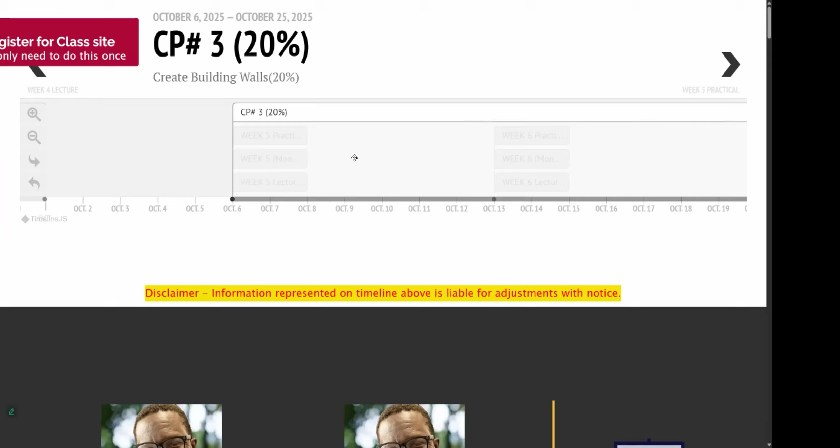Right, let's bring it up here. And if I look here, checkpoint 1, that's already gone. Checkpoint 2. So checkpoint 3, which is here, is going to be due. This is October 25. Today is October 13. Next week is going to be October 20, and that will be Heroes Day. And this is going to be October 25.

We're going to have a class on the 27th, which is going to be the day before. You said probably the 28th you'll have your final crit? Right, guys? Yes, sir. Interim, yes, sir.

All right, so tell you what. If you follow where I'm at this class, you can be done with checkpoint 3 before next week. Like you can actually be done. Next week we don't have a class, but technically we don't need a class to finish checkpoint 3, right? We're just going to do everything in this class. And if you are where I'm at, you can be done. So it's not like you'll be carrying this burden of checkpoint 3.

I'm going to be worried about that class on the 27th because I know that some of you will be MIA for that studio. Let me see, do we have a presentation on that day? Yeah, we have 9 and 10. We have the last 2 topics on the 27th.

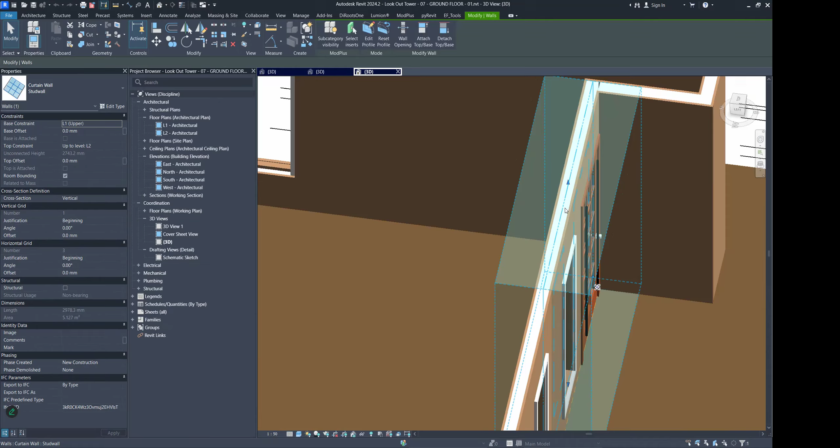For the doors and windows, how do we get it to basically show on both walls? Do we have to input it twice, or is there a way that you connect the walls? Oh yes, we did that in the exercise. You mean when you insert the window in the front, because we have 3 walls here: the front, the curtain wall acting as our stud wall, and then the inside cladding. So you're asking how you get it to cut the inside cladding.

Yeah, that's easy. I think Sarta was saying she had a similar thing. Sir, I cannot place the windows in the wall, I don't know why. I was trying to follow your tutorial but couldn't do it. Revit kept saying there's an error, and I kept trying to fix it.

I am not sure. All right, so if I delete these walls now... basic wall cladding. So I have an outside cladding right there. Did I group this? No, okay. Come on. Reset outline, there we go. Yes, delete.

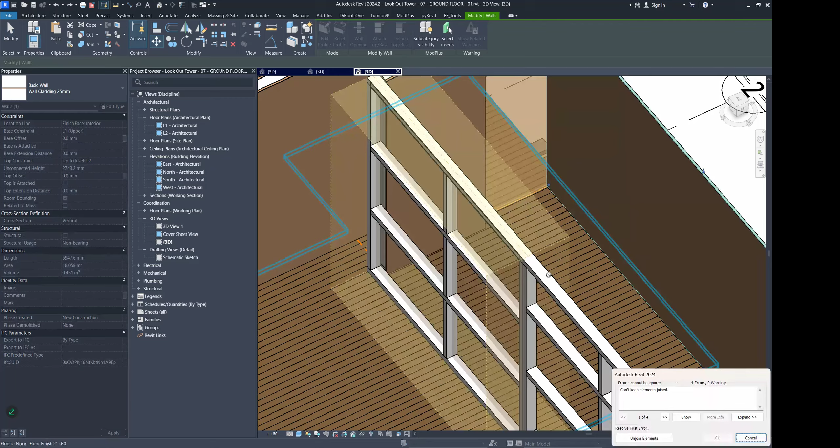So this is pretty much what you would probably have. There we go, thought I had two. Did not. All right, there we go.

And I'm going to place this space here, and this space here. So you should have something like this, where we have a curtain wall, remember we used that for that wall, and then we have the outer and the inner. Now for me to show you this, I'm going to peel this back a little bit.

So for the curtain wall, how you cut the opening is that we edit the wall profile. When you choose wall profile, I get a profile for this curtain wall here. So if I edit this profile, when this line comes around, goes up and around and down, then I need to delete this part in here. I'm going to use a trim tool and cut this. So this now becomes the profile of that curtain wall, and that's how I get the cut here.

Then as for putting in windows and doors, it's the same thing. In this case, if I wanted to put in a door, when I insert it, it's only going to insert in one of these, either the front cladding or the back cladding. So let me put in a door here.

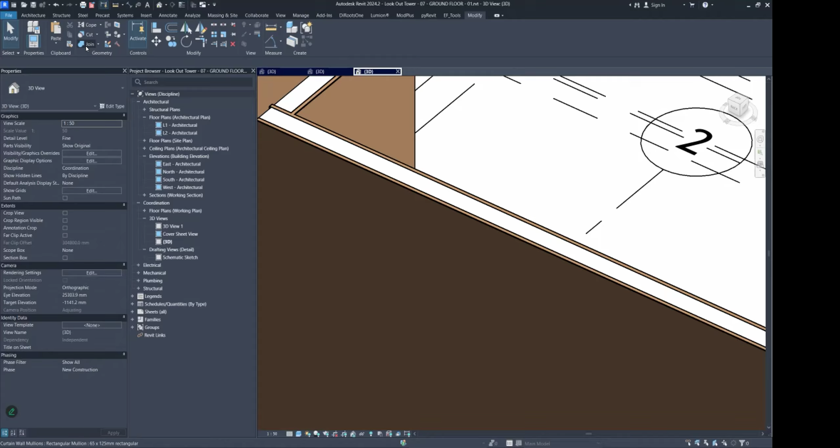Now, in order for it to cut the back wall, yes I could edit the wall profile of the back wall and cut out a profile like this. But a much shorter way is to go to modify and select join, then click the front wall and say I want to join it to the back wall. What that does is basically mirror whatever is happening in the front wall in the back wall. So if I move my door, it moves the cutout of the back wall automatically. That's how I cut all of these doors and windows in.

So you just join the walls then, and that's it. You use the join tool. That is a very nice, tricky tool that a lot of us forget about, even me sometimes. But in Revit, when you join an object together, it's not really joined like from a modeling standpoint, it's kind of joined from a meta standpoint. So even though these two walls are not touching, and I can still click on this wall versus that wall, they're still joined. That would mean that if I do something to one wall, the other wall will be affected too.

Right? Okay, thank you, sir. Yeah, man, no problem.

Third question. If I changed my design, just well, not even just a tad, because I remember you had even said to simplify it a bit more. Yeah, that's fine. You guys can edit it.

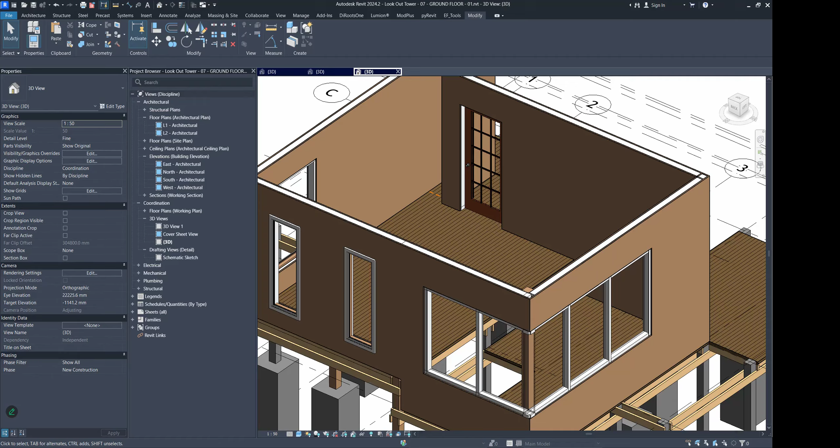So let us dive into continuing our journey, with our foundation and our site. Next, we need to start to work on the upper floor. If we take a look at our schematic sketch that we had here originally, we want to create this element here, which is kind of like an overhang, a partial overhang. So we need to add that in, and then we need to add the deck up top, and then go up with our walls up to our roof.

Okay, heading back to our view now. Let's see if we can sketch out our objective that we have here. So we know that we want an element that comes over here like this. So we do have an element that does something like this, I think. There's a little overhang there that we had in our sketch. Then the upper floor actually comes all the way out here, perhaps something like that, where it is then mounted to another post that's out here.

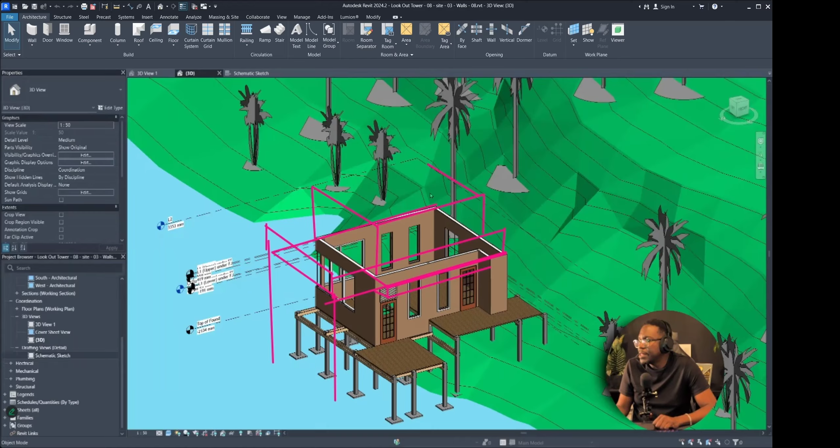So this would be our deck here. Then these walls would come straight up. We should have a little space on this side here, and then we should have the balcony. Then we should have a kind of shed roof that goes up like this, and then it is mounted like here. I know this sketch is probably getting a little confusing, but that's the basic idea that we are aiming for.

All right, okay. I'm going to take a screenshot of this and we will paste it with the rest of our notes here. We'll paste it right beside our previous sketch that we did last time.

Okay, so first let us see if we can get this element here. So to get this element here, it's really this wall that extends all the way down and then it meets up with this wall here. That's really what's happening. So I'll do a shift copy, an alignment, and I'll do another alignment here.

Now, of course, we don't want this. We want the wall to actually cut up this side like that. So we are going to use the edit profile and draw a profile like that. I'm going to trim this up here. All right, so you can see this is the profile of the wall. It does that. All right, so we're going to choose OK.

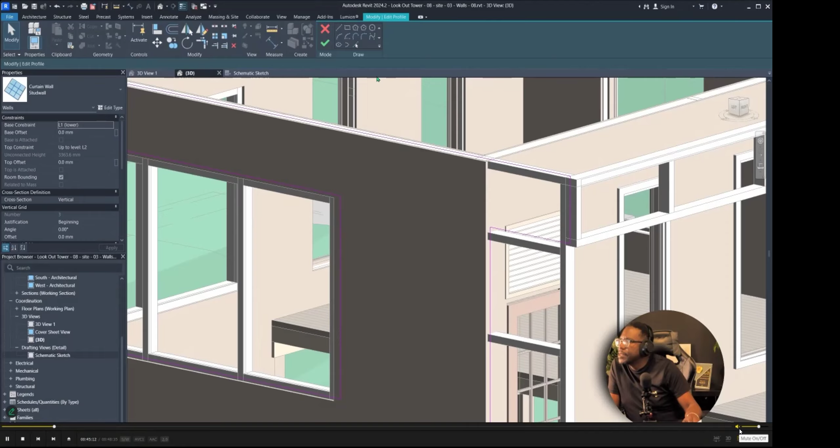There we go. So we need to do the same thing for this side now. So we need to go to the wall and go to edit profile. Let's align these together. There we go.

If you're talking to us, Brian, we're not hearing you. Oh, geez, sorry, sorry.

Right, so I was saying that when you're using the edit profile, don't depend on it 100% of the time. For example, if I wanted a space cut out of here, it would... where is it, here, right. It would not be efficient for me to draw a wall down here, then draw another wall here, and draw another wall up here. That's not going to be efficient at all.

At the same time, if I tried to use my... where is it... my wall opening tool, the wall opening tool doesn't allow me to cut all the way to the edge of a material. My wall opening tool allows me to cut inside of a wall and have an opening in a wall. But if I wanted to cut all the way to the edge, the wall opening tool will give me an error, it will say it falls outside the wall. So in that case, this is when I would lean on using a profile to do that.

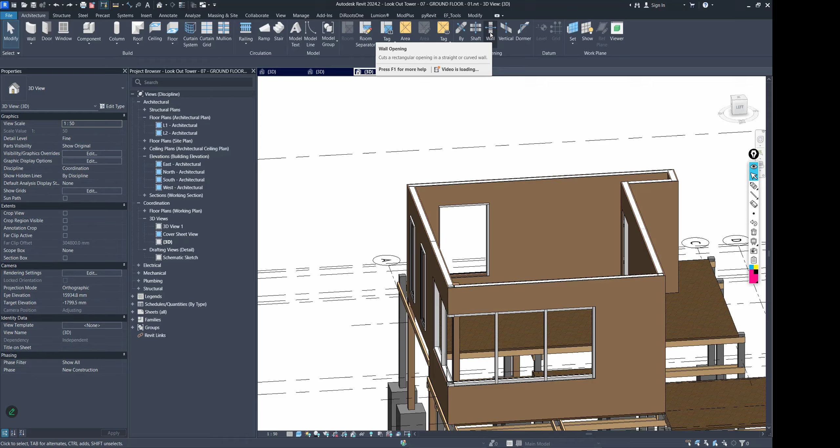But I would say you move up the rank. If you need an opening in a wall, the first opening I would use is going to be a door opening. You can use a door opening, or a wall opening, or an edit profile, but take them in that order. Because when you use the edit profile, it stays in one place. If this was a door and I wanted to move the wall with the door in there, it wouldn't move—the wall would just move and the opening would stay in place.

This wall here. So what we can do is we can actually connect these walls here like that, and then we're going to edit the profile of those walls. All right, choose OK. We do have an overlap, or maybe it's not touching. Yeah, okay, there we go.

So we finished that part. Now we need to do this part. So we're going to do the same thing, edit a wall profile. All right, so now we have this element here, so we can pretty much now do our floor slab on top.

Now we plan to have the stair in this corner here, so maybe we'll go up and then bend a corner to go up the stairs. So we'll just keep that in mind for later.

Now, before we draw the floor slab, we want to take a look at how the construction of the slab works. If we look at this section here, we can see our stud wall that we have below, and how it works is that we have these wall plates—in this case it's a double wall plate—and then you have the floor that's sitting on this wall plate here, and then we have kind of like the outer covering here.

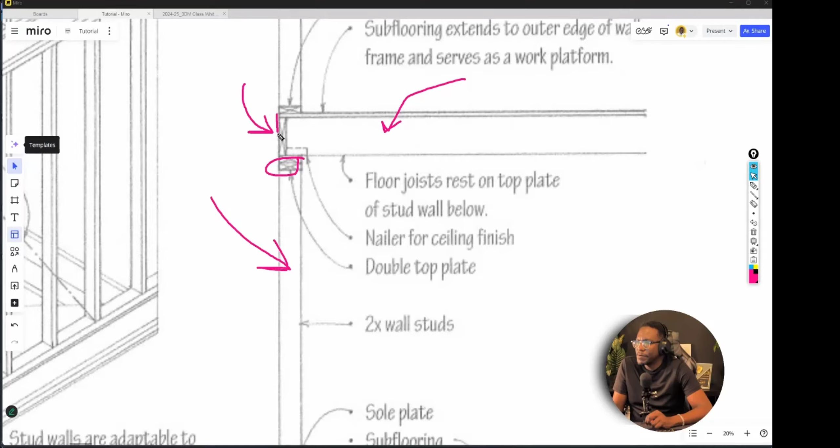So we have this outer member here, and then we have the floor joist pretty much sitting on top of the bottom wall, and then we can mount our walls to the floor, which will sit on top of this floor joist. So this is the concept we want to use, and this is kind of what it would look like in 3D.

Now, if you remember our last conversation about the different detail levels, we're kind of going for this one, meaning we don't need to construct every single timber member that would structurally make up this floor. Instead, we're going to summarize it and only put in the major elements. With that said, let's continue.

Now, if you take a look at what's happening for the floor system here, you can see the major floor joists running along, and then you have this covering that sits on top of these floor joists. Then you have the next upper floor walls sitting on top of the finished flooring. So this is how we're going to construct it.

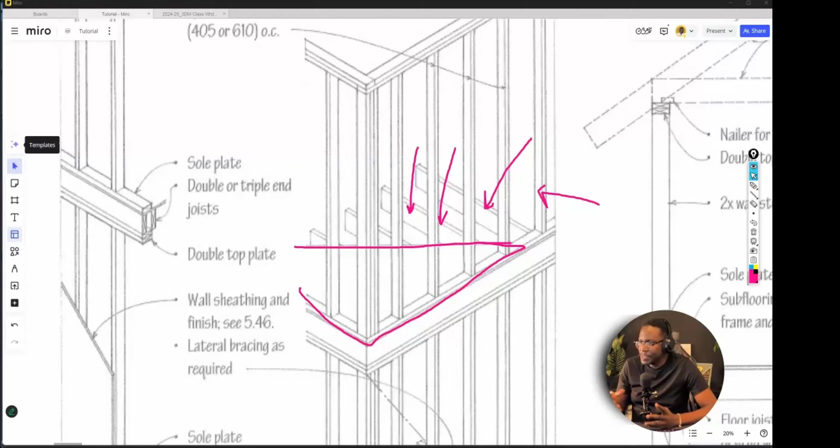We're going to put these main floor joists in 3D, but we're not going to put all of these individual pieces of timber here. We're just going to summarize our 3D model into only having the major elements. In some cases we might need to model all of these members individually, but rarely. Usually you average it, and if you need construction drawings, you cut a section and detail the members individually. So we will not be modeling every single member here, only the main floor joist you see here.

So now what that would look like for us is we would have main floor joist members running something like this. As a matter of fact, we might run it the other way actually. So we'll run it this way—this is just a rough sketch to give you a visual idea of what we'll be doing for these floor members here. And then we'll have a timber stud here that it is mounted to. So that's the general idea.

Now to get this done, we're actually going to use some tools from the structural section, right? So we are going to...

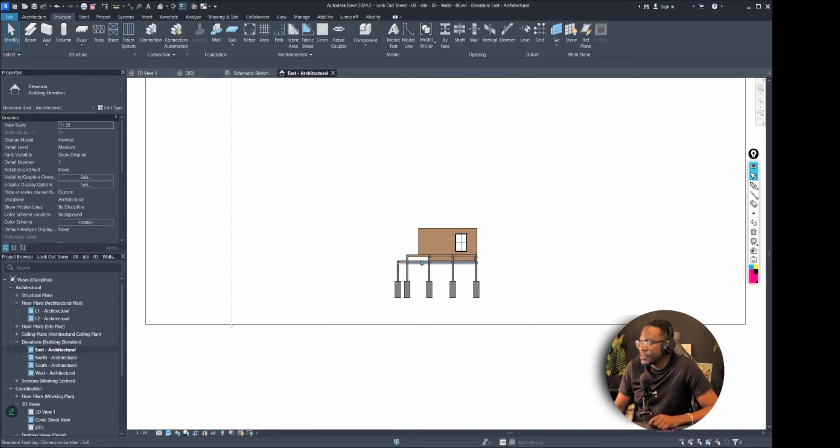Now to do this, let's take a look at the levels that we have. So if I go to my elevation view, I'm going to go to the east elevation. I'm going to hide my site plan again, so I'll right click and choose hide elements. All right, let's see. Okay, let's use this view. Okay, so let's hide that.

So now that we have just the building alone, we want to create those members on the second floor. Now, these members are actually going to sit on top of this floor here. So what we need to do is create another level. We're going to duplicate this, copy, make it 6 inches, and then unlock this so I can make this one shorter. This level here will be top of floor joist, so my floor joist is going to be running in this direction.

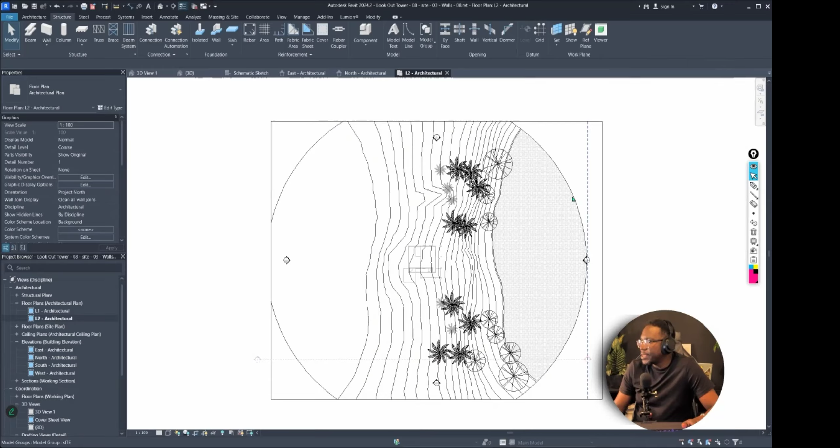Now, in order to put in the floor joist, we are going to use what's called a beam system, and that can only be done from a plan or 3D view. So I'm going to go to my level 2 floor plan. Again, I'm going to hide this site plan because I don't need it now. So I'm looking at the floor below, that's why it's grayed out. And I'm going to head over to structure, beam system.

If I look in the settings for beam systems, you'll notice I'm going to put this on the other side—there we go, so we can get some more space over here. So if you notice, you see the rules: it's going to lay out the beams at a fixed distance, and this is the distance between the beams. Maybe we could do 900 millimeters, about 3 foot between the beams. It's floor joist, so maybe it would be closer, so maybe 600. It's going to be using a 2x6, which is fine. And it is going to be on—we need to choose what level they will be on. Now we can always draw the structural members first, and then put it on a level.

Now if we look at the top, you'll see where it says automatic beam system or sketch beam system. So we're going to go to sketch beam system. When we go there, you can see that it's going to put it on level 2. Actually, we don't want it on level 2. We want it to go on the level that says top of floor joist. So we're going to go to set work plane, and we're going to use the level that says top of floor joist as the level for the beam system. Okay, so now all we have to do is draw our beam system.

I'm going to start from here. I'm going to draw a rectangle like that, and I'm probably going to make it go maybe to here. Maybe it will be wider. We will see if we'll make it wider. Now these two lines that you see here give an idea of the direction of the beams. This means that the beams will be running this way. All right, so we're going to choose OK.

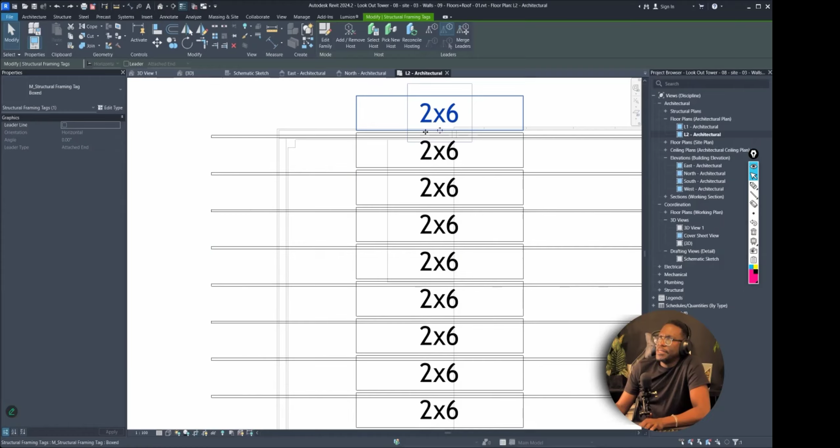Now if we click on one of these members here, you will see that it says it is a framing tag. And a tag simply means that it is an annotation. So for example, I can just delete these tags. If I go to annotate, you will see there is a tag that's here. Basically a tag is, you can pretty much just tag anything that you click on. So if I hover back on the beam here, it will create back this tag. If I hover over this wall, it will create a wall tag, and any member that you hover over, it will create an actual tag. So let me undo that. So that is what this is, these are just tags. I'm going to just select all in view and just delete that, because we don't need to have the tags for what we're doing.

Okay, so let's look at this in 3D. So you can see that is our beam system there, right? And what we may do is we may extend these posts to maybe use it as a mount for these posts here. We'll investigate that a little later. All right, so yes, we have our system, our floor joist system there.

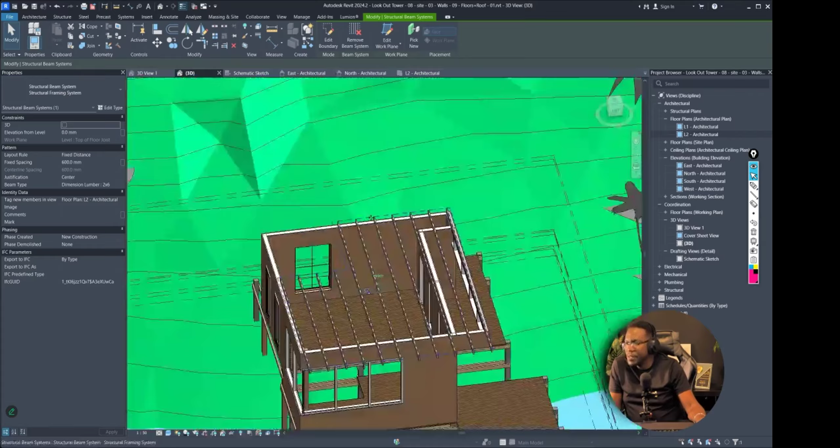Now we are going to cut a hole here for the stairs later on, but that will not be an issue, because remember we used a beam system, so we don't have to manually adjust each of these beams. We can simply just edit the beam sketch that we drew, and we can actually just put a space in here. We can trim this like that, choose OK, and there you go. So now we have a hole that we can work out later for the stairs. And this is the beauty of using the beam system, is because it will automatically be generated when we use it.

Okay, so now we're going to put the floor on top. So we're just going to undo this last move here, because we're not going to put in the stairs just yet. We can always cut that hole later on. We know the general area for the stairs, so we will refine that as we go on. Now to put on the slab here, we're just going to put a floor slab on top of this.

So to do that, well, we can actually go to our side view here. Actually, this is a little lower, so we're actually going to move that down like that, and we're going to create another level. So we're going to copy this, and we're going to call this FFL for finished floor level. We're going to maybe copy it about 2 inches, and we are going to just break it out so that we can see what we're doing. There we go. And we're going to call this finished floor level.

So this is where our slab is going to go for the upper floor. So let's go to a floor plan view, preferably. This is our level 2 plan. So we're going to go to architecture, create floors, and right now this is a 12-inch floor, so we are looking for a 2-inch floor.

Here we go, floor finish 2-inch. All right, we're just going to use the box and draw our floor finish pretty much inside like this. We do need to set the level, so we're going to make the level be FFL, floor finish level, and choose OK.

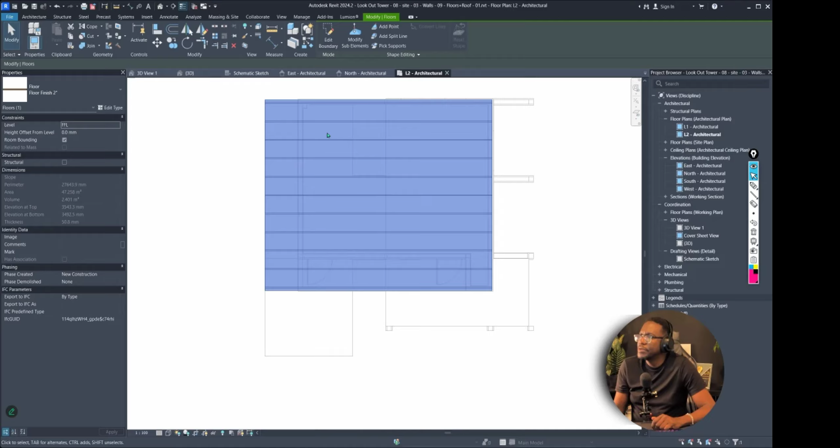All right, let's look at that in 3D. There we go. So now we have our floor finish that's sitting on top, and then we have our floor joist that is sitting below.

Now, in my case, I do want my deck to go out a bit more to match my sketch, because in my initial sketch and also in my schematic design, I had it where my balcony was pretty much going way over to a greater overhang. So I'm going to edit the sketch here, and extend it by moving this by another, let's make it 900.

Yeah, that's okay. And I'm going to do the same thing for my beam system. Notice I can select the individual beams. For example, if I really wanted to place this beam at the very end, I can use tab to tab into just a single beam, and I can actually align it. Oh, right now it's locked, so I'd have to unpin it. There we go, now I'm able to move that beam individually. But the great thing is that it's still part of the beam system.

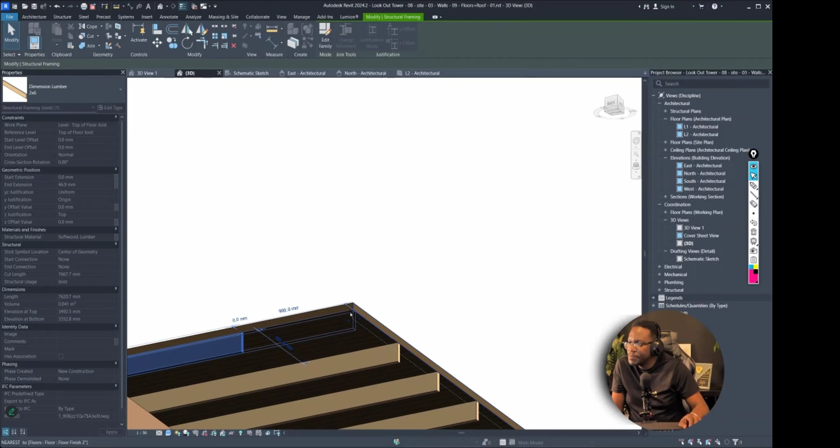So let me unlock that, and I'll use my align tool and just align it like that. Now I'll go into the beam system and edit boundary. There we go, choose OK. Oh, because I unlocked this one, now this one is all manual, but that's okay, I can just extend it. All right, so now pretty much I'll have another column.

So I'm going to align this with this edge here. What I should actually do is just copy all of this, and then I could use a view. If I can't see below, I could go to my options for the view, and say for underlay, let me see all the way down to bottom of foundation. That would allow me to see all of these.

Now notice that I still can't edit this from this view. I can actually overwrite that by going down here and saying allow me to select underlay elements. So I turn that off, and now I'm able to select these. There we go, okay, this goes all the way to the edge in here. That's fine, I'm going to copy this to the other side. There we go, and I'll turn that back.

Let's go back to the 3D view now. All right, great. So now all I need to do is set this column's top level to be finished floor, and same thing for this. All right, so now I have my members here. Now I do think this column needs to be much thicker based on how high it's going, so we'll have to edit that as we go on.

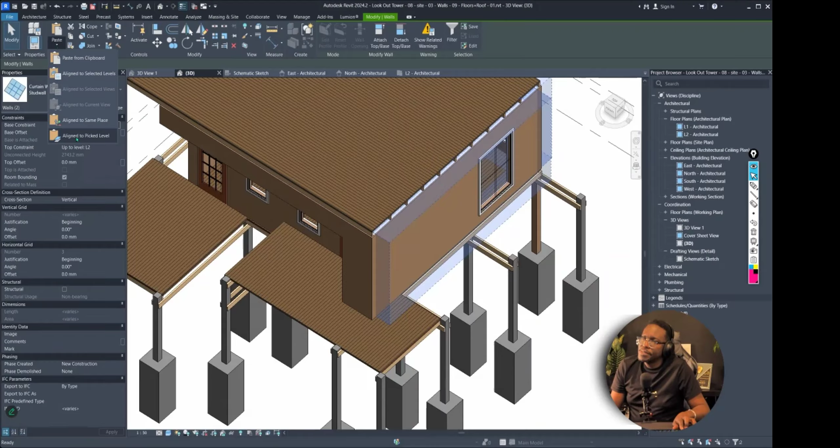Okay, so now we're ready to continue with our walls. With the walls, it's pretty much the same formula as the ground floor, where we just carry the walls using the frames. So we could select these two walls for now, go to copy, then go to paste, align to selected levels, and paste this to the finished floor level. There we go, so now we have pasted them. All right, so now we just need to continue.

Now this wall here on this side is going to be aligned with here actually, so I'll use a top view and copy this over here. I'll paste it in the center. Oops, meant to paste this in the center like that. Let's go back to 3D view.

There we go, then we're going to cut this down. Come on, there. And we do the same thing for this wall. Let's go to a floor plan. We can turn off the underlay and set the underlay to go to level 1 lower. There we go, so now it doesn't look so confusing, and we can copy this there.

All right, so we pretty much have our upper floor walls done, and then we're going to have the balcony that is going to be around this edge here.

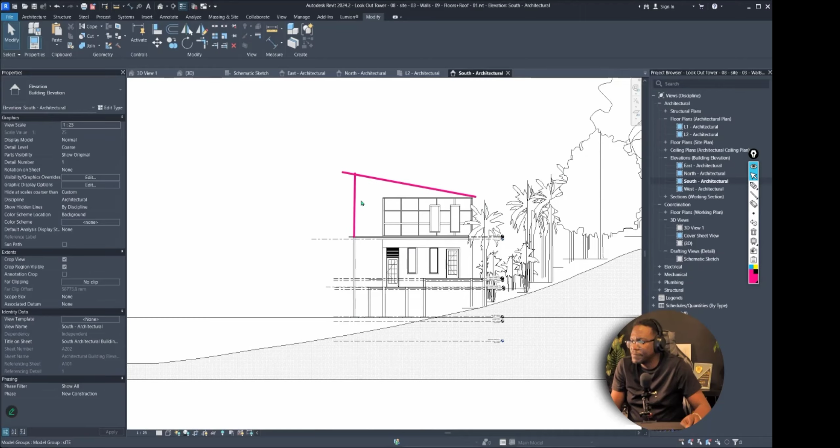We're not going to worry about the openings just yet. We're going to put in our roof first. If we go to a side view here, this is the back. Generally we want a roof that slopes like this, supported by columns coming from the ground floor, with balconies doing something like this. Then we're going to work on filling in the areas above where we have the walls.

To get our roof, we're actually going to draw it using the top floor plan. To do this we need another level, so we're going to copy one up. We don't need a floor plan for this level since we already have an upper floor, but we need another level to use for the roof. I'll copy this level here and call it top of wall plate, because that's the top of that wall plate.

These walls are not on the same height, so we need to fix that. Let's highlight all the walls and use the filter option to select only walls. We'll set the top constraint to top of wall plate, with the top offset at 0 since we don't want it to offset from the top. Now everything is on one level. Let me check - yes, everything is there.

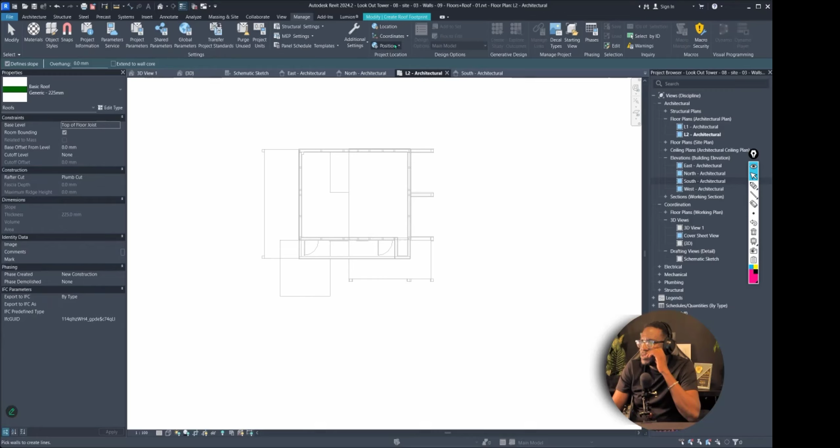Now we need to do the roof. We'll go to a plan view on level 2, then go to Architecture, then Roof. The roof is drawn by sketching, so we're going to sketch the outline of the roof, starting from here. This is the outline of the roof.

When drawing the roof, we could set an offset, which is the overhang. So we could set a 2-foot overhang. Now when we draw it, we automatically get a 2-foot overhang like that.

Now we need to define the slope for each of these edges, because of how Revit works. If you imagine a hip roof - right now this is creating a hip roof because this symbol defines a slope. It's saying I want this line to slope up, same for here, and here, and here. When Revit puts all of that together, it assumes that if you want all 4 lines to slope upward, you must want a hip roof, since they'll all intersect at one point.

If we want a roof that just slopes one way, we need to erase the other slopes, and then Revit will know you want a roof that slopes using this line as the pivot, sloping upward. To do that, we select each one of these: select this and say no slope, select this, no slope, select this, no slope. So now the only thing that slopes is this line, and it slopes by 36 degrees.

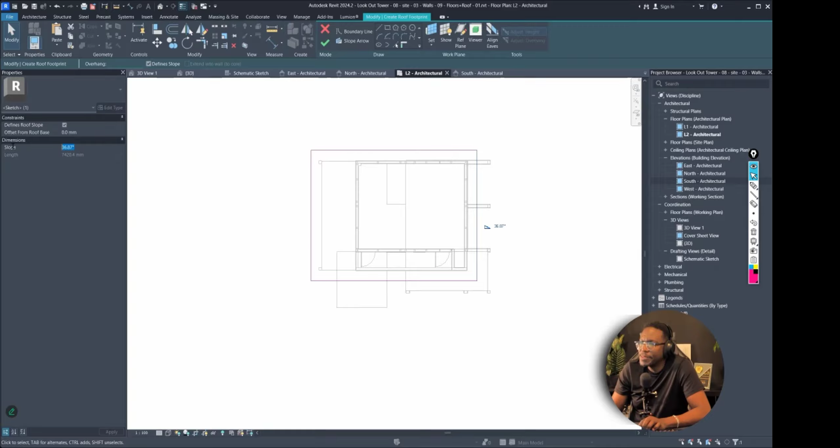We're going to put that to 25 maybe. The thickness of the roof we can change afterwards, so we'll choose OK. If we look at our side view, we see that it slopes upward - of course it slopes from the top of the ground floor. So we need to change the base level of the roof to top of wall plate. Now it slopes upward.

I think this angle is a bit too steep, so let's go to edit. If I go to edit from the elevation view, it's going to say you can't edit the slope of the roof in the elevation view actually.

So I need to do that from either a 3D view or a plan view. I want to change this slope to like 15 degrees. Okay, yeah, I think that's a little bit more reasonable.

Now what we want to do is change the thickness of the roof. We have some pre-made roofs here, but we're actually going to put structural members as well. So we're going to choose generic, go to edit type, and duplicate this, and we're going to call this roof covering. We'll go to structure and make this 2 inches. Say okay and okay. So now this is 2 inches.

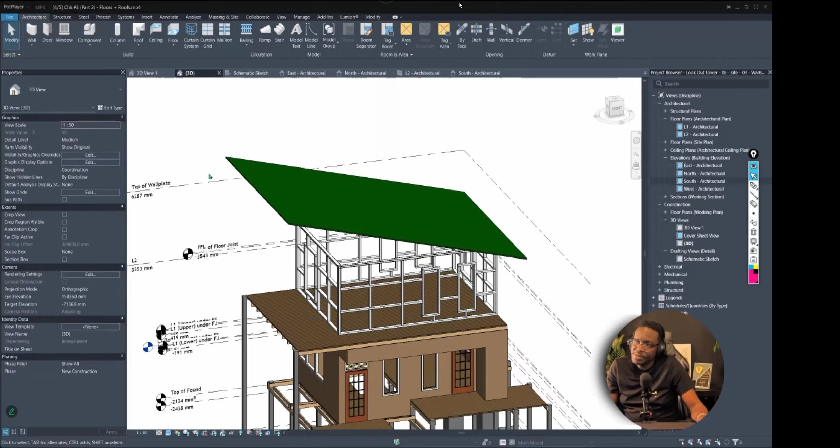Now the next thing we want to do is put the same structural system and attach it to the roof. There are a couple ways we can do it. We could attach a structural system to the slope of this roof, and that way we can get the beams to slope with the roof. Let's try it that way. Let's see if we can do this in a 3D view.

We're going to go to structure, then beam system. Before we go any further, we're going to set a new work plane. For this work plane, we're going to choose pick a plane, and we are going to pick the underside of this roof like that. So now the beam system is using the underside of the roof.

So then I'm going to go to sketch my beam system, and I can actually just sketch on the underside of this roof because I made it the work plane. There we go. And I can see that my beams are going to go this way, and I'm going to use the 2x6. I could also choose a thicker member if I wanted to.

I would have to load more lumber in. So for example, if I wanted something apart from a 2x6, I could go to insert and go to load family. Then I would choose structural framing. Let me go back to structural framing under wood.

And then I'm looking for dimension lumber. When you load that, you see these other ones here. So I could do a 2x12. Now that that's loaded, I can change this to 2x12. And the distance is 600. Then I'm going to choose yes.

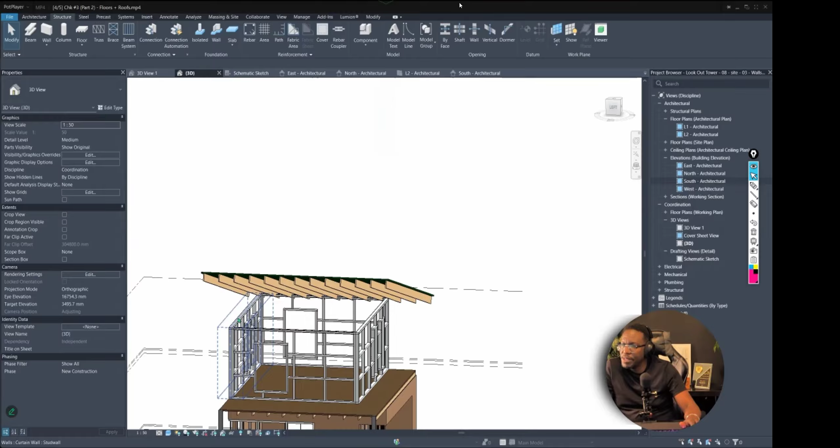Now, the next thing we would normally do is allow these walls to automatically meet the top of the roof. There are two ways we could do that. We could actually use the profile and edit the profile, or we could click on the wall and go to attach top or base. So we're going to do this, choose here, and then it would attach itself to the top of the roof like that.

Right, so when it is attached to the roof, you can see that is what is happening in the background. Now, in reality, you would really have one of these members on top, and then this wall plate would be attached to the underside of one of these roof joists. The thing is, you can't use attach top or base to a joist. But there are some other things we can do.

So we're going to undo that. Now, of course, we could go in and draw our profile, and we could actually draw a wall profile that is to this angle, and that would be okay. But let's try something else that is new.

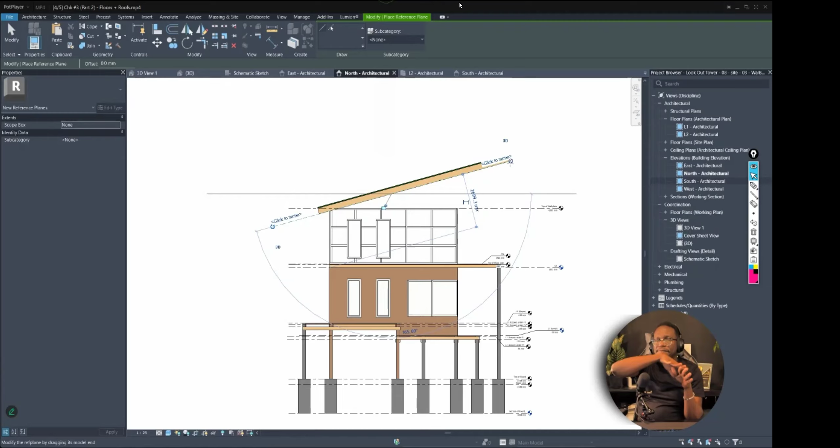We're going to use a reference plane. So let's go to our side view here, and go to the architecture tab, and say reference plane. What a reference plane is, is simply a plane that is referenced. It is a work plane, think of it as a work plane. Remember how we have work planes, and if we define a work plane, then that becomes the base on which we draw, we work. So a reference plane is like a custom work plane.

For example, I've now drawn a work plane at an angle. So if this were my current work plane, I could extrude from it, I could draw on top of it, I can do all kinds of things with this.

So I can give it a name as well. I'm going to call this underside of joist.

Now what we're going to do is go to 3D view. We can select the wall, but we won't see the reference plane in 3D, so we'll have to do this from a 2D view. Let's go back to our 2D view. We're going to say attach, and then choose this reference plane.

Now I'm getting this message because remember we have edited the profile of this wall, so it's just telling us that some of the elements in here might be deleted because of the profile. All right, let's attach the other wall now.

I'm using tab, that's this wall. Attach the reference plane. All right, so if we go to 3D now, there we go.

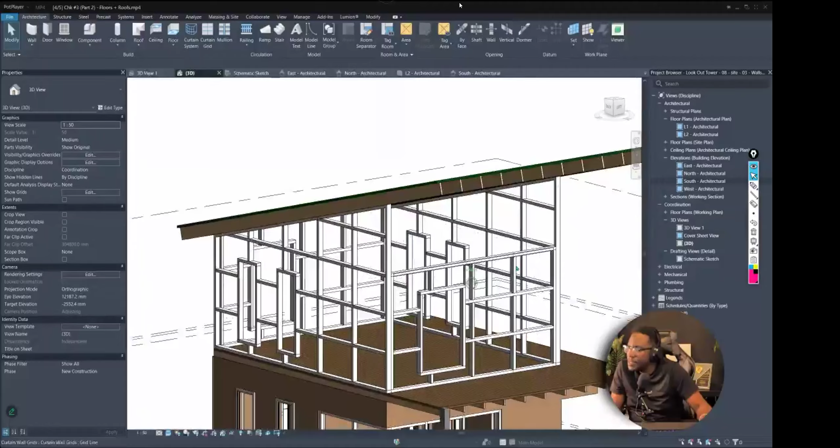Now, of course, we would adjust these members to line up with that. Before we do that, let's just adjust this one here. Just drag this up and snap it to here.

Now what we could do is select this member here and unpin it. That's one option. Let's see if we can copy it. But if we're going to copy it, we'd probably have to do it from a top view. That would be best.

We could go to top view and go to wireframe. Maybe this would be too confusing, so we could actually hide the roof and now we're able to see the top. So this is the one here.

So we already unpinned it and we can actually copy this here. Let's look back in 3D view now. Oh, we are in 3D view. All right, so you can see where I made a copy of that one to be sitting on top right there. It's actually 3 members that I placed here.

So maybe we could get rid of this one. All right, we're going to go to the unhide tool, which is down here, and we're going to unhide this roof. Unhide. There we go.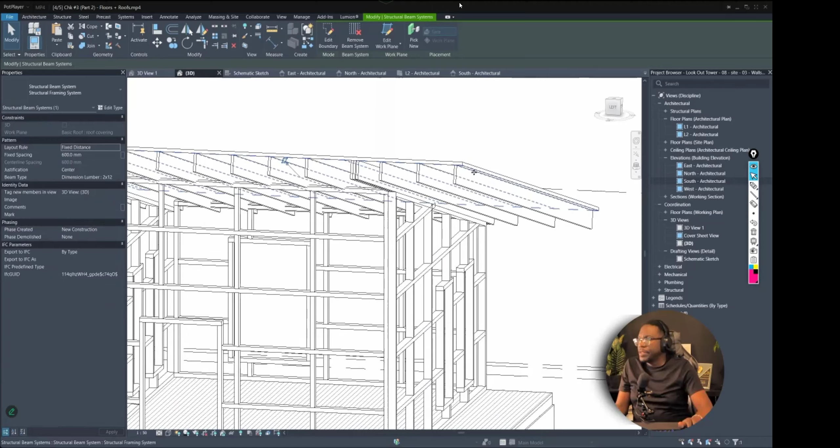Now, additionally for the roof structure, we normally have some laths that are running the opposite way as well. To do that, we can actually just duplicate this system to create that one.

So I can find the beam system, I'm pressing tab, there it is. Then I'm going to choose copy, and then choose paste to same place. So now I have 2 exact beam systems on top of each other, but now I'm going to go to edit boundary and say define beam direction to go this way instead of that way. And then I choose OK. Now you can see I have a set of beams running the opposite way.

Now, obviously, we don't want to use the same size beams, so we're going to have to go to insert family, load dimension lumber, and I see 2x3 is the smallest one, and choose OK. All right, so for this beam system, we are going to change that to 2x3, and you can see this is much smaller. Now, this could be how it is built, because we could cut notches out of this timber here, but usually it sits on top of this member that's here.

So to do that, right now this is attached to the underside of this roof member here, so we would need to attach the beam system to some reference planes. We're going to use the same reference plane concept as before. We're going to go to architecture.

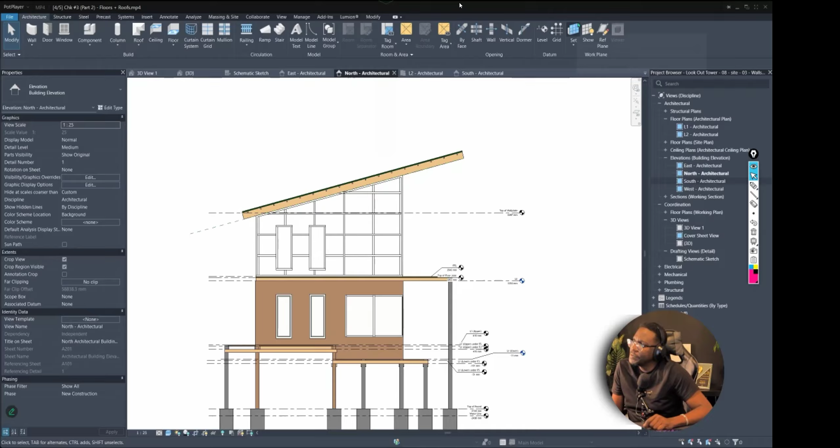Now I can go to create reference plane and I can draw a reference plane here like that. And I can name this beam roof joist reference. I could copy this again. Now what's the distance here? And I could name this reference plane lath reference plane.

All right, so here's what I want to do. I want to find out this height here. So this is 64 millimeters, or 3 inches, right? So I actually want to go the opposite way, really. I want this to be 3 inches away from this.

So now I can select this. I can select the beam system for, can I do that? I can't do that from a side view. I need to do that from a plan view.

So let's select the beam system for the roof joist. We're going to say edit work plane, and we're going to choose edit work plane rather than pick a plane, because we can't see the reference plane. We're going to attach this to the roof joist reference plane, which shouldn't move.

But then we're going to go to the beam system for the lath, and go to edit work plane, and put that to the lath reference plane. And now see that now sits on top.

Actually, I need to edit that some more. So let's go to the side view to change this. We can actually move the reference plane and it will move here. So for a dimension, this should actually be 64 millimeters. Then we can actually move the roof to this reference.

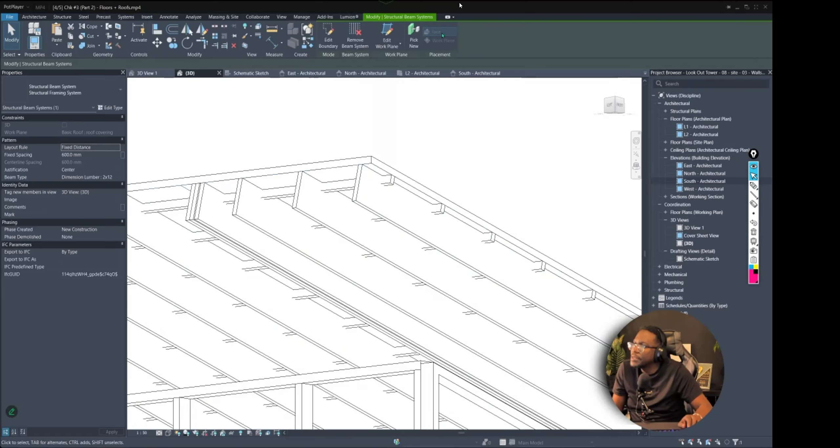Now I think what's happening here is that we had one of the members still attached to these guys here, so we want to attach this one to the roof joist reference plane. There we go. Now you can see that we still have these ones here because we actually broke the link off with these, so let's remove them for now.

I think we actually had this using the beam system to get these members on. So now we can actually fix this beam system because we kind of messed with it by clicking on it and going to edit boundary, then choosing reset system. So now it will create back all of those members that we edited earlier.

All right guys, so you see a lot of discussion here about the roof members, and all of us will have different roofs. I chose to put in the lath and the roof joist and the covering because each one of us has different designs. So I kind of chose the most complicated way so that you can just take from it whatever applies to how you want to do your design.

But remember, the roof cannot be a slab, right? It has to be a timber roof, so you do at minimum have to have roof joists. You don't have to put it at an angle, you don't have to use a hip or a gable roof, but you do have to show some kind of roof structure to get the full marks.

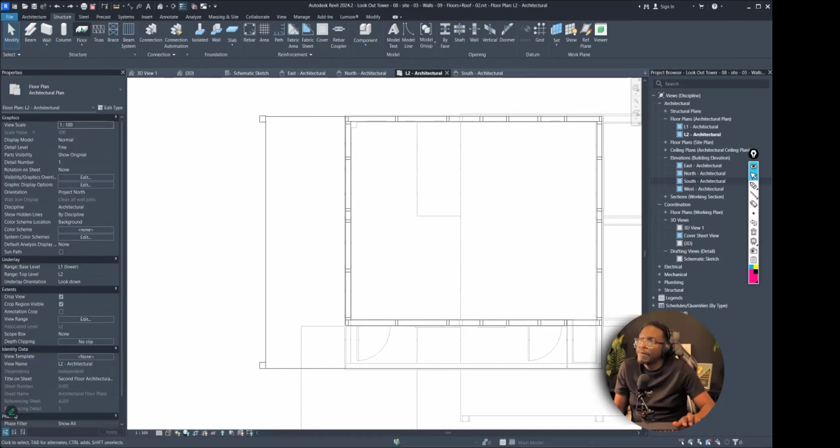Now remember, we're not seeing it because it is probably... let me undo that. Let me go again to draw. But I need to determine what level I am on. So right now it is going to be on level 1 upper, but I need this to be at the top of wall plate. There you go. Now it is actually there.

If I go to 3D view, I should see it. Let's see if we can locate it. Okay, let's do that again. Okay, there we go, that's what we're supposed to see.

So, okay, what I want to do is to draw it here, but I think when I draw it there, it is actually attaching to something - that's the problem. So, right, here it is. So let me delete this. So what I need to do now is go to edit work plane, and I need it to be the top of wall plate level.

Okay, so there we go. Now it is at the top of wall plate level, which is right here, if you remember. So let's go to the side view and full detail view so we can see it better.

Ideally, now we could attach it. We could make a reference plane right here, or we could use a level as well. I think in this case either option will work.

So let me copy a level and put that level right here, and I could call this level 'wall plate for upper shed support.' That's a very long name.

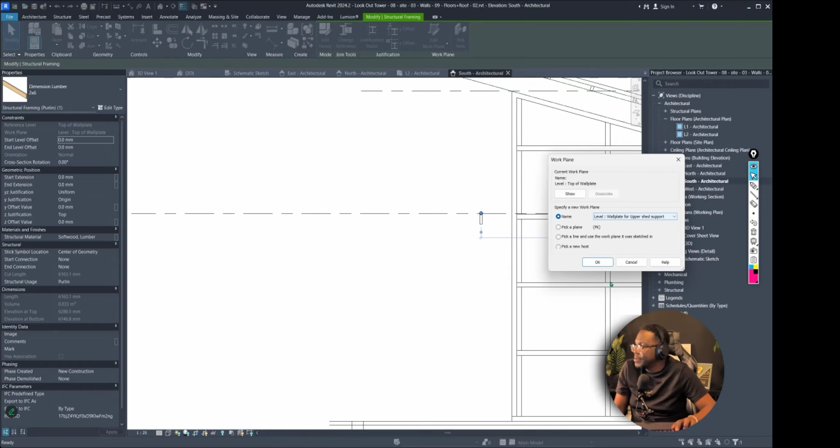Now I can go to edit work plane and put it to that work plane, which is up here. Then I can align it to this edge right here. And I'm thinking there should probably be two of these, since it's holding up that massive roof.

So let's go to a 3D view. Remember, this is a 2x6, and I want to change it to 2x12, so it's much bigger.

I also want to extend it, so I'll just use align. Now this member here should really be aligned to underneath here. There we go, like that.

So we'd probably need another one of these members up here, and then we'll need another one down here as well. Let's use the side view.

I think I want to copy this again, and this time stick it down here. Then I'm going to name this one - yes, I know this name is already there - I'm going to name it 'wall plate for lower shed support.'

Good, and then I'm going to copy this and paste, align to selected levels, aligning it to here. So it should paste here, and I'll just align it over here.

All right, so now I have a member that is here, and another member that is up here.

Now we can deal with the openings, which is the simpler part. The openings are the same business as usual. We do want to have an opening here, so I'm going to go to edit wall profile and draw it like this.

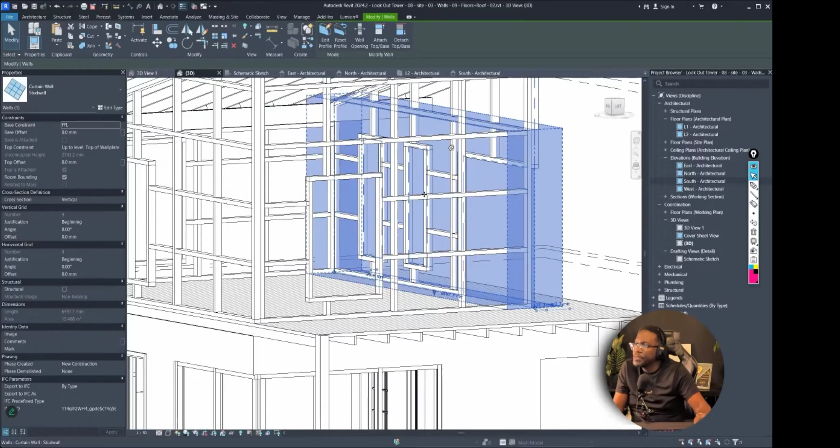Actually, we do need to have a column here in this area, so we could just edit the wall plate - sorry, the profiles - appropriately. I'm going to copy this 4 inches, and the same for this side.

All right, so now it's just a matter of putting back the wall coverings to cover these areas. We could do this from a plan view, but I think I'm going to just copy this because it already has the windows from the previous plans.

Now I can do one of two things: use an elevation view, or copy and paste, align to selected levels, and paste it to the finished floor level. There we go - not exactly, but that's okay.

So I would need to go to reset profile. There we go, right. And I would also need to go to this and delete this, because we don't have a window here anymore - we just have these two windows.

So I'm going to remove the base offset. That's good, then move these windows down. Now we need to do the same thing for here.

Or we could actually copy this, so I'm going to mirror it. Let me see what my work plane is - that's the problem, my work plane is there.

So I need to change my work plane. I'm going to change my work plane to finished floor level. If you ever get in trouble mirroring something, it's probably because the work plane isn't aligned properly.

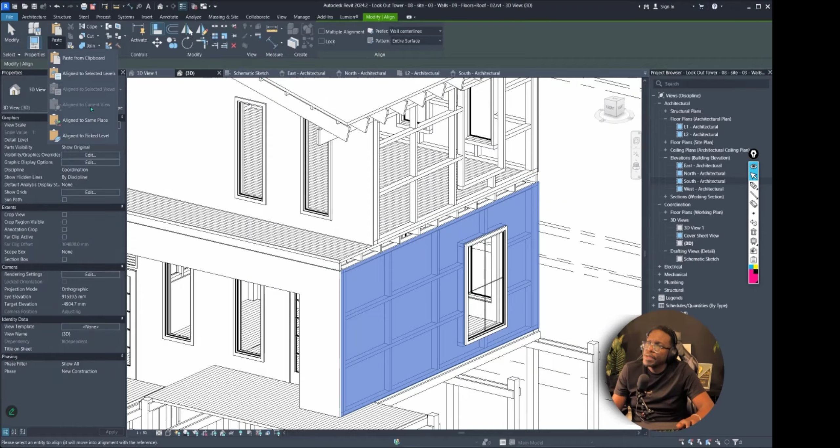We're going to copy it and paste, align to selected levels. Oops, maybe I didn't do that right. Copy - there we go. Then we're going to remove the base offset, and we could actually use the arrow keys to move this window. That's a neat trick.

And then we're just going to mirror this for the front. For this, we're going to do the same thing here where we attach, and we need to do this in an elevation view.

So we're going to select this one here and say attach to reference plane. Attach at this side. We're going to do the same thing. Yes, we also need to get some openings up top, but we can look on that a little later. And we're just trimming these corners.

Now we need to edit the profile, or we could have inserted an opening as well, but I think the profile is the easiest thing to edit here because we can see the opening behind. We're just going to edit this one as well.

All right, so if we go to our shaded view and unhide this site, this is where we are now. So we've now added the upper floor walls. We've added the slab. So next we will have the stairs and the railings.

We can actually tidy up these parts here by increasing the height. We'll have to change the profile if we want to change this one here, but that's okay. I think I like that effect. All right, so this is where we are now.

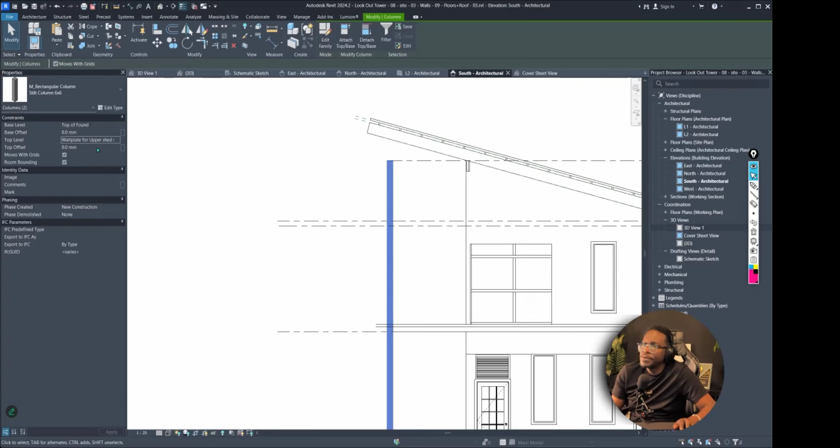So plate for upper. Oh wait, let's do that again. Let's do both, and we want to set the upper level to wall plate for upper shed. It's up here, but we need it to go higher. So we could go a top offset of about 1 foot, make that 2.5.

There we go. Then we also need to use bigger members for these. So this was a 6 inch by 6 inch. I would go to duplicate and make maybe 10 by 10. So I would need to go here and make that 10 inches. Okay, so now this is much thicker.

All right, okay, so we are making some progress. Next we'll deal with the railings and the stair, and then we probably have to deal with the interior as it relates to needing a stair on the inside as well, and a little wall here so we don't drop in between those spaces.

All right, so it's looking a bit similar. Maybe there are some things that we ended up changing from the schematic design, but that's okay. That is where we are at currently.

All right, guys. So, most of us should be. That is where I want us to be, at least by this week.

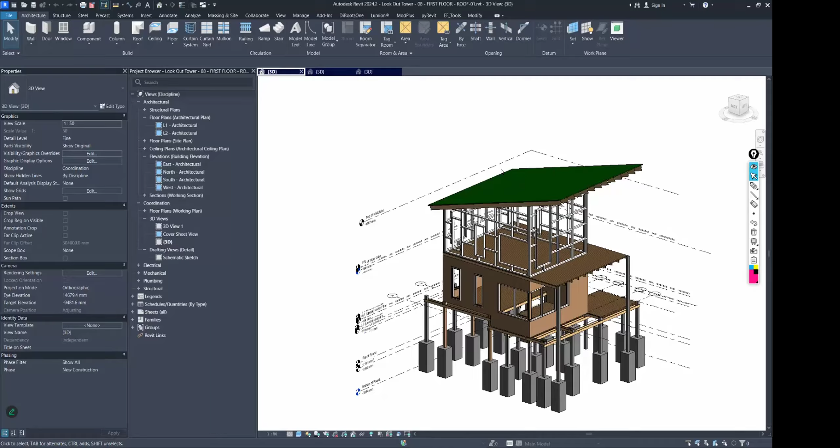Now, is there anybody that has their ground floor finished already? Anybody? Yes, sir. Right, so what I did was went ahead and did the upper. Now, usually what we would do is I would kind of leave it like this, and then you guys would work on it. But we need to push it a bit further for this class because we don't have a class next week.

So I am going to go into adding the railings so that you can have that part of this class recording to work on to finish your building. All right, guys.

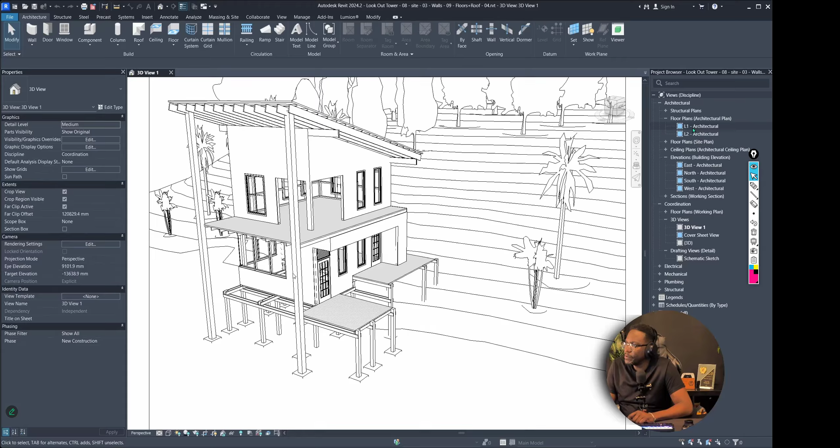Alright, as I say guys, I am going to move ahead into stairs and railing, because we would have done that next week, but we don't have class next week, so we're just going to cram it all in today so that you will have this recording to work from. I'm going to go to a top view here.

Now when I go to this top view, notice that I have my terrain and everything there. Now it might be a little tricky. Let me switch this to hidden line. It might be a little tricky to have all of the terrain along with your building in, so a good idea would be to create a group. I'm going to select the terrain here, so I've selected my terrain and my trees, and I'm going to go up here under modify to group. Okay, it's just telling me that some elements will not be grouped, so I'm going to call this terrain. Now I can easily select my terrain and trees, and I can just hide that.

Now I also have a sketch that I have been using. If I move it here, you'll see that I have this sketch here. This is what we used initially to determine what the shape of these areas will be. I don't need this sketch anymore, so I'm going to just delete that. All right, so this is essentially my floor plan that I'm looking at, and this is level 1.

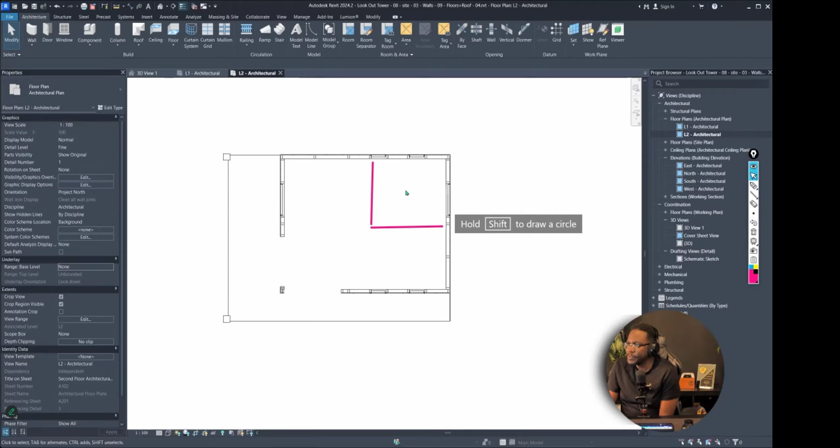Now as for my level 2, if I open that plan now, I'm actually looking at level 2, but I do have underlay enabled here, so I'm going to disable that because I don't want to see what's below. I just want to see the upper floor. So this is exactly what the upper floor is, and this is that opening that's there along with the windows. We are going to cut out perhaps an area here, and we will investigate putting a spiral stairs perhaps in this area here that will come up from below to come upstairs.

All right, okay, so let's head on to the ground floor. Now the first stairs we want to add is going to be the stairs here, right, that will take us from the level 1 upper to the level 1 lower. Now to access the stairs tool, we want to be in architecture, and then we're going to go over to stairs. Now when you're using the stairs tool in Revit, right here we can actually see a list of the different stairs that's available. One of the most popular ones is going to be the first one, which is a straight stair, and then we see spiral stair, curved stair, L shape, U shape, and then this one here is a custom stair tool.

So if we want to get a stairs that is non-traditional, we will use that tool. Now in terms of what we want to achieve, we want to have a stairs here, so we could just use the straight stairs to do this. We're going to click stairs, the straight stairs. Now right away, when you see that's highlighted over here on your properties panel, notice that this is asking us what is our base level and what is our top level. Our base level is going to be level 1 lower, and our top level, which is where we want the stairs to go, that is going to be level 1 upper.

Before we actually start drawing the stairs, we are going to choose the type of stairs. If we click this drop down here, you will see that we have 3 types: cast in place stairs, precast stair, and assembled stair.

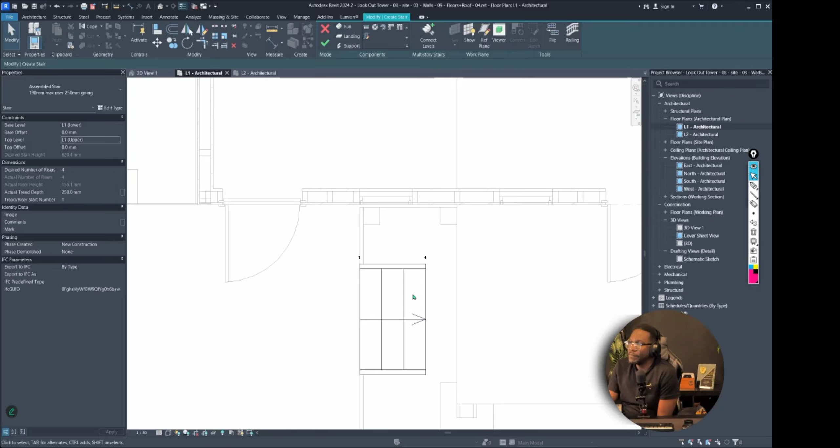Notice it's not creating any more risers apart from the 4, so we're going to just click that. Now we have our stairs, and we'll click the OK button here. If we look at that in 3D, this is the stairs that we see.

Now what we're going to do is modify the stairs a little bit. The first thing is, if we don't want to end the stairs with a riser, we could end it with a tread instead. We also want to edit the stringers, that's the elements on the side.

To make those modifications to the stairs, we need to click on the stairs and choose edit type. These are all the settings for the stairs. So we're going to say let the stringer be carriage for the left and for the right, and choose apply. Notice we have the carriage that's going to be below like that.

Now we can also select the stairs. When we select the stairs, we get a set of options for selecting it as an object in our scene. But also we can go to edit stairs, select the stairs again, and we get a different set of options. It's almost like you can select the stairs as an object, then go into editing it as an editable object, so you have 2 levels of editing the stairs.

So when you click and go to edit, we're going to choose to end with, and uncheck end with riser, so that we will end the stairs like this. Let's go back to the plan view.

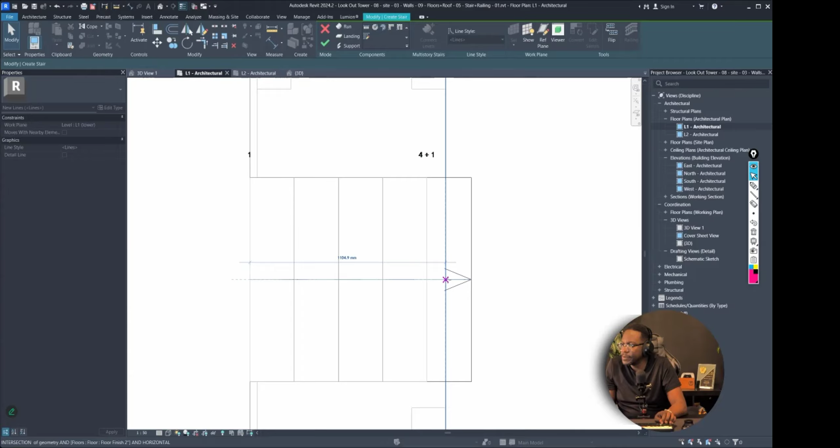So we go to our level 1 view, and we can actually extend the length of the stairs a bit, like so. Back in 3D, maybe this is a bit too tall. Let's go back to level 1 and carry it down a bit. Yes, right, and that takes us to that level there.

Now all we need to do here is extend the boundary of this. So we're going to do a line, choose OK. All right, so now we just need to change the width of the stair.

To do that, we're going to select the stairs. Let's go to plan view. Notice we can't change the width here, we need to actually go to edit stairs. Now we can change the width. All right, that's looking pretty good.

Now we're also going to copy the stairs. So we're going to select the stairs here, and we are going to copy and paste the stairs on the inside. And we're also going to extend this. There we go.

Now we can actually take a look at what this looks like in 3D. Notice that this is inside, you can kind of see it inside.

A neat little trick you can do if you see something in plan: let's say you're in plan view and you want to see this stairs only in 3D. You can head over to Modify with the stairs selected, and click this button here to show a selection or section box of the object you clicked. So if I click that, it will just isolate the stairs by itself, which is pretty cool.

I can even go ahead and edit this section box to make it a bit wider so I see a bit more. There we go, so that is pretty cool. I can always disable this section box by clicking in the empty space, clicking on the view, and then turning off section box in my properties here. Now I'm back to everything.

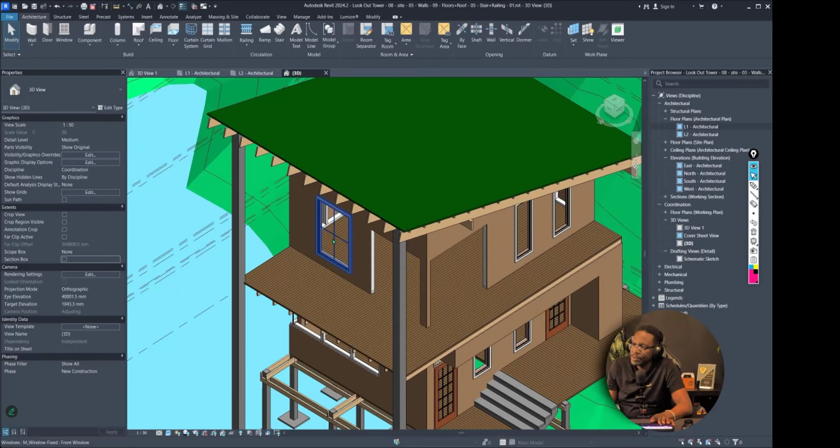All right, so now we have these two stairs here. Now we want to create a stairs along here, and this time around we're going to create a custom stair, just to try out a different option. We also need to create a spiral stair here for upstairs. Now to create a custom stair, let's see if we can plan this out.

For our custom stair, we're going to come down, then take a curve and go like this, and then go straight. So we're going to go straight, take a curve, and then go straight again, and we'll do something like this. Now this stairs is going to be a concrete stairs, and notice that it's going to be very irregular in its shape. This is intentional because we want to investigate how to create a custom stair. So this is what we'll do here.

All right, now to get started we're going to go to the stair tool. As a matter of fact, before we go to the stair tool, whenever we're doing a custom stair it's always a good idea to sketch out our stair first, and then we go to the stair tool. So we're going to start it that way, sketching out the shape we want our stair to be like.

So if we look in 3D here, the first thing we need to determine is what levels the stair is going to be at. For example, we have these levels here. We know we want the stair to come up to this level, level 1 upper. But where does the stair meet the ground? We might want to determine a level for that too, because remember stairs operate based on a lower and a higher level, so we have to determine a level first.

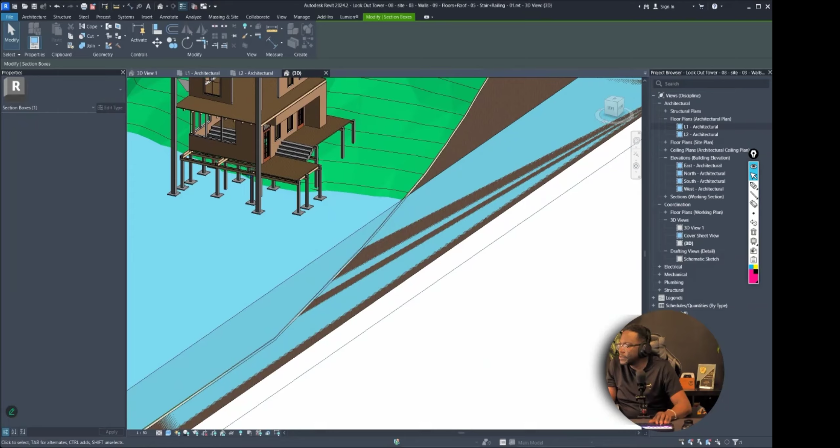Yes, so we're actually going to change our design a little bit. We're going to come like this, do a curve, and then angle straight down like that. So we're going to come down to this slab down here using this very interesting stair. It's still going to be an irregular stairs, and we're going to come from this level, level 1 upper, and end at this level, which is going to be our water level. So that's going to be our plan.

Now, as I said, to get started we are going to sketch the stairs first. So we're going to go to our model line, and we're going to be sketching. Remember, model line is a line that exists in 3D space, so we need to determine what level we're going to draw on. Right now it's set to level 1 lower, which is this level here, but we want this to draw on level 1 upper. So we're going to set our work plane to level 1 upper. All right, so now when we go to model line, we are at level 1 upper.

All right, so let's start sketching what we want our stairs to be like. We're going to go from here, and for the width of the stairs, we can make it between these two columns here. Let's make it a definite width, I'm going to say 1200. Then I'm going to come like this, and we're going to form a curve. Let's do the other side. Here we go, and we want to curve around, then go down. So we're going to draw it out first. Let's see if we can end right here. We might need to make this longer, I think, so let's go like that.

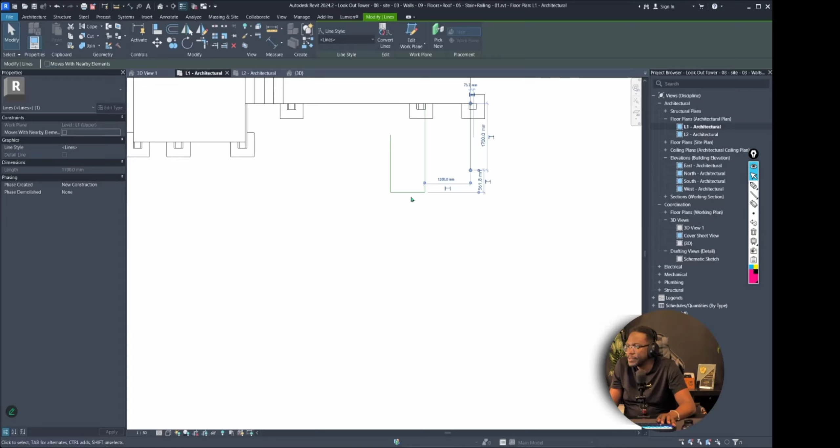Now the width of the stairs is 1200, so I can do an offset of 1200, and I can do a fill for that. So this is basically going to be our stairs.

Now, of course, we want this to curve because we're doing a custom stairs here. So we're going to go to model line, and in our model line tool we're going to work with a radius. We're going to make a specific radius, 1800. There we go. And then we're going to offset this 1200. So there goes our curve there.

So we can trim this up now. We're going to curve all the way down, and then we're going to hit a landing here and then step down to this level. Maybe we need to come out a bit more, so I'm going to move this out some more because I don't want to end up underneath the building. Hopefully this should be enough. The shortcut for the model line tool is LI. So there we go.

Now we need to put in our treads, so we're going to work with 12-inch treads. We're going to actually start from here. So we're going to copy 12 inches, and I'm just going to copy this. What I'm doing is I'm sketching out where the treads would be for the stairs. So I'm going to step down here, and then we're going to come around here. Every time we step down, we're going to step down about 6 inches.

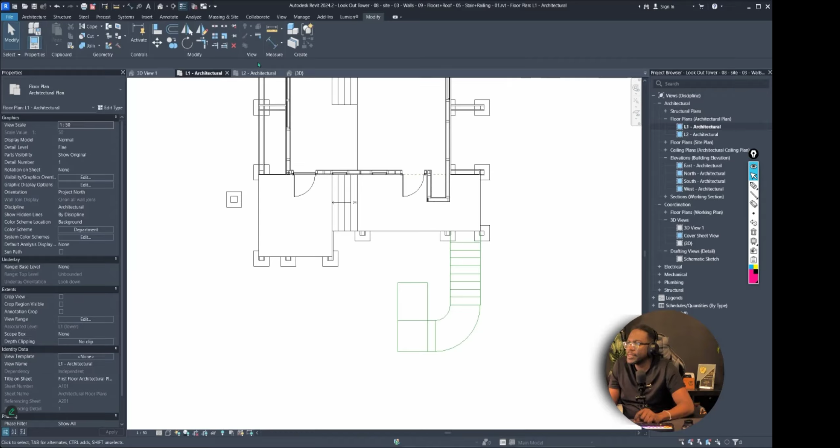And if I look at our section here, we have about... here we go. Yes, we're traveling from level 1 up to the water line. So, side elevation: we are going to go from level 1 up to the water line, which is this. There we go, so we're going about 10 feet roundabout. So if we're going down by 6 inches, then we're going to need about 20 steps to get from one level to the other.

So let's go back to our plan. 1, 2, 3, 4, 5, 6, 7, 8, 9, 10. So this is going to come a little bit forward like that, because we're going to need about 10 steps. So this should take us there roughly. Now we're going to need to divide this space evenly.

Now, to divide this curve evenly, what we can do is start with a rough estimation and then revise it. First, let's see if we can find the center of this point here. So here it is. If I hover over this line, it gives me an idea of the center point. What I can do is just a rough estimate of the amount of risers — the size doesn't really matter, since I'm going to divide it evenly afterwards. So let's say I want to divide it into 5 equal parts.

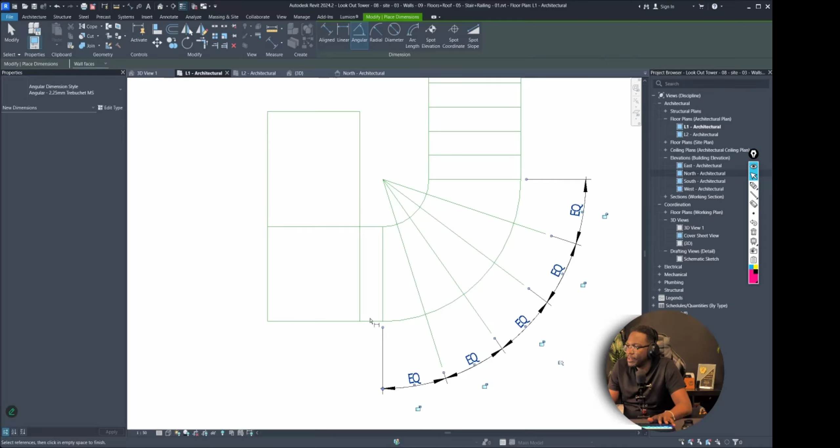This one is not exactly 12 inches, but I could decide to move this back to 12 inches. I could put a dimension here — oh, this is actually 12. Good. So far I have 4, 6, 8, 9, 10, 11, 12, 13, 14, 15, 16, 17, 18, 19, 20. So, okay, we could get a few more here. I'm going to copy this. This should take us from one level to the other, right? And if it doesn't fully take us, we can always edit it afterwards.

All right, cool. So now what we need to do is go back to architecture and go to the stair tool. So now we have this. Oh, there's one more thing we have to do before we go to the stair tool — we need to draw a center line down here. So we're going to start from here, draw a center line there, and draw a center line to here, and then to here.

So this is going to give us the center line for the stair. We can actually use the offset tool, use the graphical offset, and offset this distance. There we go. All right, so these are all the pieces that we need.

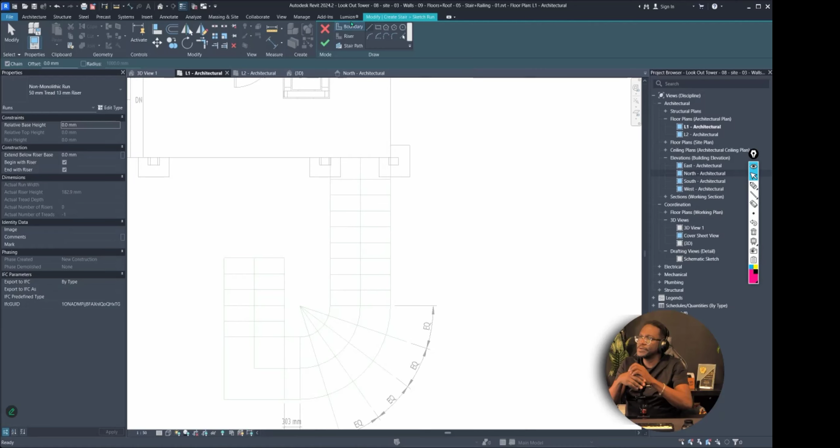So we're going to go for real this time, go to the stair tool, and this time we're going to choose sketch stairs. Now when you're in sketch stairs, you want to keep an eye on these three icons here. This icon defines the boundary of the stairs, which is the edges of the stairs. This determines the individual risers, and this determines the direction.

So first thing we need to set is the boundary. Now, because we already sketched the stairs here, I don't need to draw the stairs. Instead, I can just use the pick line, and I'm just going to pick the edges. Now, very important, don't pick the start and end edges, because those are actually risers, right?

So we're going to choose risers now, and we're going to go pick line again. We're going to pick each one of these risers. We're going to pick this one there. We need to actually trim these. Now, one thing when we're doing the stairs tool, everything has to be very neat, or else the stairs won't generate.

Next, we're going to choose the direction of the stairs. So as usual, we're going to always start lower and go higher. So we're gonna start from here. I think we can just pick the lines again.

There we go. Then we need to choose the levels. So we're gonna create the stair, and then we choose the levels. All right, so there we have the stairs. So we're now gonna click, and let's see what it looks like in 3D.

All right, great. Well, we're going in the opposite direction though, unfortunately. So we're just gonna click this and go to flip. There we go. So this is the direction that we should go.

Then we're also going to change the stair type. We're going to go to edit type. Okay, hold on, right? And we're going to change it to monolithic stair, because it's going to be a concrete stair. All right, the base level needs to actually be Water Line. There we go. So yes, it's a little lower.

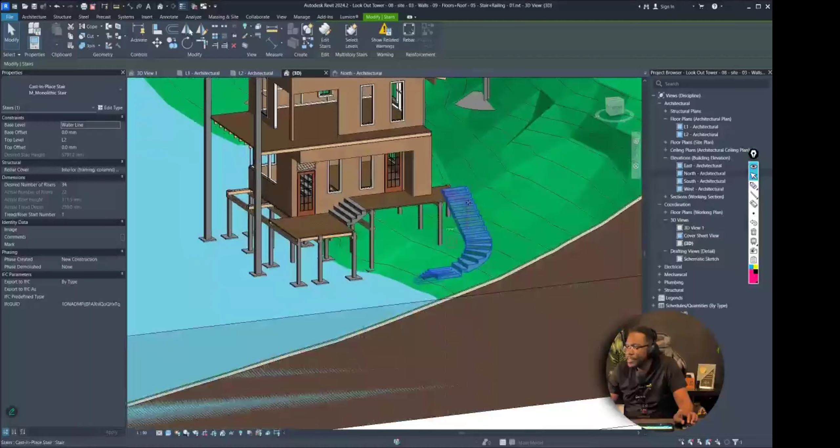We could actually let the top level be, so the top level is going to be level 1 upper, right? So this is where it should start. Then it would come down and go all the way down like that.

Okay, we can go to edit stairs and click on the stairs, and we want to offset the height a bit. Let's try 6 inches. There we go. All right, so this basically works as how we want it.

All right, we can also go to edit type here, and we can choose the underside of the stairs. Right now it's set to smooth. The structural depth is 150. We could make that 300, and you can see the stairs is a little bit more thick. We could make it like 1,000, and that would basically give us a thick stairs, but let's leave it, that's good enough. All right, so we created a custom stair.

Let's choose OK. And what we could do, this is just giving us a warning message about the different levels, but it's fine. Now, we could adjust the terrain to match the stairs more, but for right now, this is fine.

All right, so let's create a third type of stair, which is going to be our spiral stairs, and that's going to be on the inside. So first we are going to save.

All right, now before we create the spiral stairs, we're going to need to cut a hole, or we could create the stairs, then cut the hole. So let's go to the second floor, and well, let's go to the ground floor. So we want the stairs to be in this corner here.

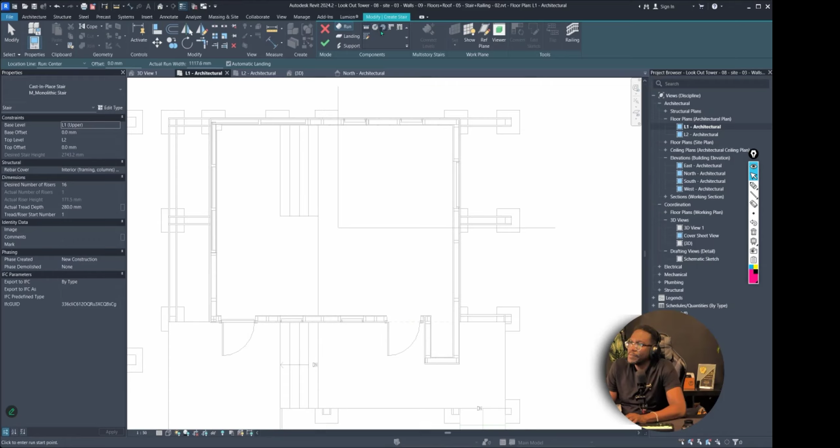All right, so we're going to now go again to the stair tool, and this time we're going to go to a spiral stairs, right? And we're going to choose our base level. So our base level is going to be level 1 upper, and our top level is going to be finished floor level, because that's above the level 2.

And we're just going to place the stair, and this would basically determine the radius of the stair. Now we can always edit this afterwards, so it's fine. So we need to determine where we start and where we end.

And we can choose that option where we click the stairs and say section box, so we can see what it looks like. All right, that is pretty good. So we go around and then we come up like this. So we're going to need to edit the top floor to match the stair. And we also are going to need to edit how the stair ends, so it ends on a tread and not a riser.

But let's cut the hole first, right? Now to cut the hole, we can just click the slab here and edit the boundary of this, and we can just draw... actually, yeah, we're going to need to open this entire area here. Let's sketch it in first, so it's going to be something like this. We can always edit it afterwards.

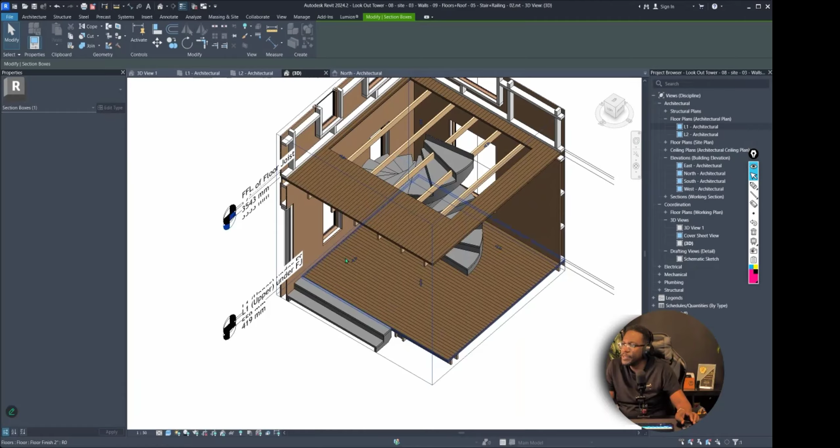Choose OK. Let's adjust the section box. The section box is really helpful to help us isolate the areas that we're currently working in. All right, so we're going to adjust this like that, if we can use the tool to our advantage here. Actually, we should just carry this all the way to the edge like that. Then we're going to do the same thing for this.

So we're going to select the beam system, not the individual beam, but the beam system. And then we're going to go to edit boundary, and we're going to do the same thing. We're going to just draw a box, and then we're going to use the align tool. All right, choose OK.

Now we need to carry this in front of the stair, and we need to edit the stair. So we're going to click on the stair, go to edit type, then click on the stair again, and we're going to say end with tread. So there it goes. Then we're going to edit the floor, edit the boundary, and let's see if we can use the pick line.

We can pick this line here, and we're going to trim this like that. We can do the same thing for the beam system. We're going to pick line, and then pick the edge of this line here, edge of this line here, and then we're going to just trim all the beams, following that.

All right, so then we have stairs that go all the way up. We're definitely going to need to put some railings on this stair. All right, we can actually delete these tags. They came back when we, I guess, when we created those new beams. All right, so there goes our stairs for our upper floor.

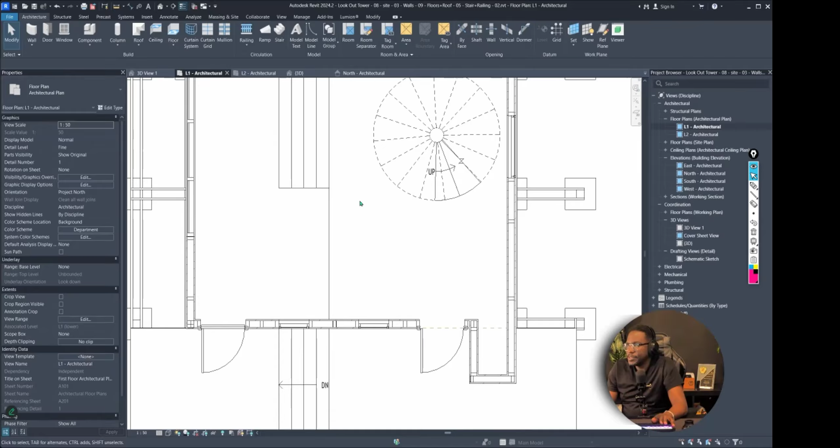And if we look on the ground floor, we can delete this guideline that we used. All right, we're going to put a railing here as well to block off this section here. All right, so I do believe that we have placed all our stairs. We can delete these guidelines now that we used to create this stair.

So we're actually going to select everything here and just use the filter tool, and we're going to filter for lines, and we can delete it. All right, so we pretty much have our stairs in, and there goes our spiral stair on the inside. So now we need to get the railings done.

So let's talk about the railing tool. Now the railing tool in Revit is actually quite simple, but at the same time can be quite complex. So first, let's look at the general idea of how the railing tool works.

So we're going to go to level 1, and for example, we know that we need a railing to go all along this edge here. So we're going to go to architecture, go to railing. Now the first thing to notice is to see what level our railing is at, so we're going to change this to level 1 lower.

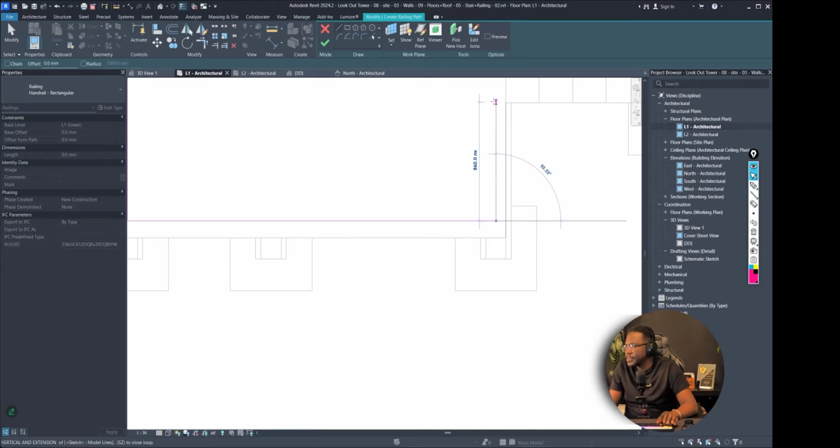And the railing tool works by sketching. So we're going to choose the line tool, and we're going to start from the center there, and we're just going to sketch like this. And then we're going to click on sketch again, see if we stop here, and then click on sketch again to this point here. Now, if we hit OK, then we have our railing.

And if we go to 3D, let's disable the section box. You can see our railing is pretty much done.

Now, to get a railing on a stairs, all we need to do is go to the railing tool. This time we're going to choose pick host, and to attach it to the stair, we're going to choose the little down arrow and choose place on stair or ramp. Then we're going to click the stair right there, and that's it. It's there. What we're going to do is click this side here, see if we can get to it.

Then we're going to delete it from that side. Now the same thing can be done to this stair here. So we're going to go to railing, the little down arrow, and choose place on stair, and there we go.

Now we do need to edit this stair so that the railing stops at the end of the stair. So we can actually go into edit stair type and go to edit sketch. Now we do need to go to a plan view to properly see this. So let's go to plan, and we could take off a few risers, maybe like 2. It's okay, and yeah, we need to get rid of width.

So we need to go up a little bit. So we're going to click on the stairs, and we are going to do a base offset of about 1. Yes, there we go. That ends just about right.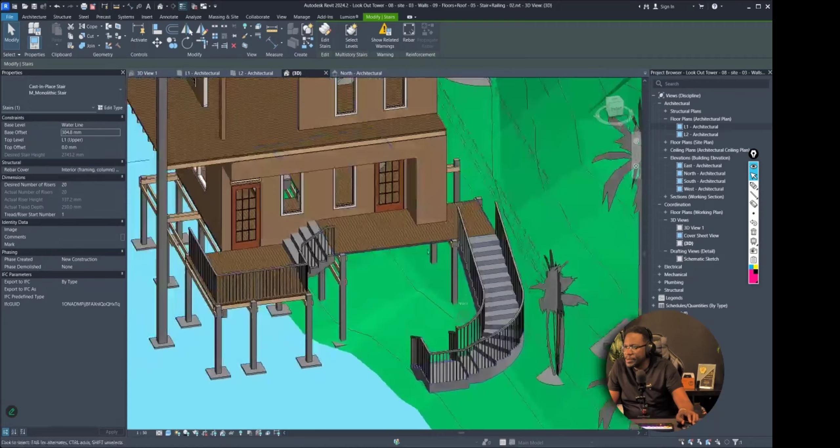Then we're going to add a railing here, and here. So we're gonna go to our level 1. This time when we go to railing, we're gonna make sure that we are on the level 1 upper, and then we're gonna sketch from here to here, and here back to here. This is just saying that the railings you draw have to always be connected. So we have to draw this, then choose OK, then go back again and draw another railing, because they always have to be connected.

There we go. All right, now we need to add railings to the upper floor, so we're going to do that now. We go to railings, and then we're going to attach this to finish floor level. All right, so we have the railings in now.

Now, as you notice, there is nothing too special about this railing. It's very basic, and this is one of the default railings built into Revit. Now, another thing that we can do with the railing tool is customize what the railing looks like, and this is what we're going to do now so that these railings can be a lot nicer.

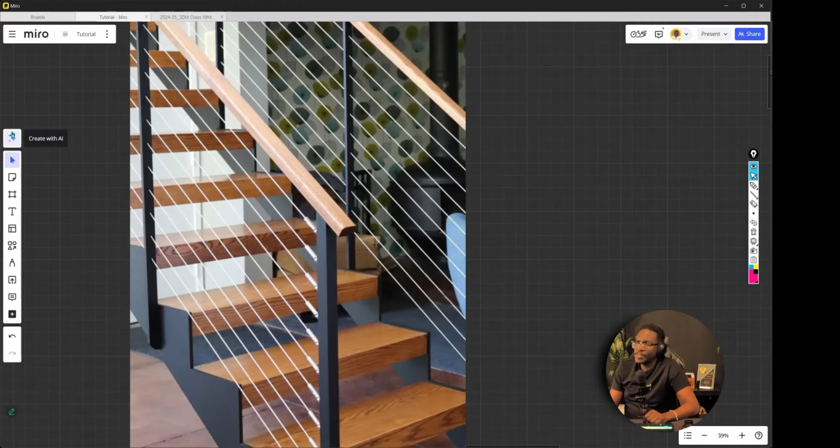So we're going to choose a reference image of a railing type. If we take a look at this image here, I think that this railing type would be very nice, where we have some steel wires, a very modern baluster going on here. So we're going to try to create this custom railing type using some of the railing tools. Let's put this over here. Now, the railing tool in Revit, as I said, is very simple, but also very robust.

So to edit this railing, we're going to click on it, and then we're going to go to edit type. Now, railings are made up of different segments. For example, Revit refers to these as the rails. Top rail, this is a top rail. This is actually a top rail extension type. These are balusters, these are handrails, these are handrail supports, and then there are posts. So all of these railing types, Revit has options to edit all of these railing elements.

And when we go about to create a railing, we have to just break it down in terms of elements. Now, if we take a look at what we have here, we can see that in this case the rails are the wires. The top rail is this member here. The balusters are this kind of flat iron here. There are no handrails, no handrail supports, and then the post would be this square element here.

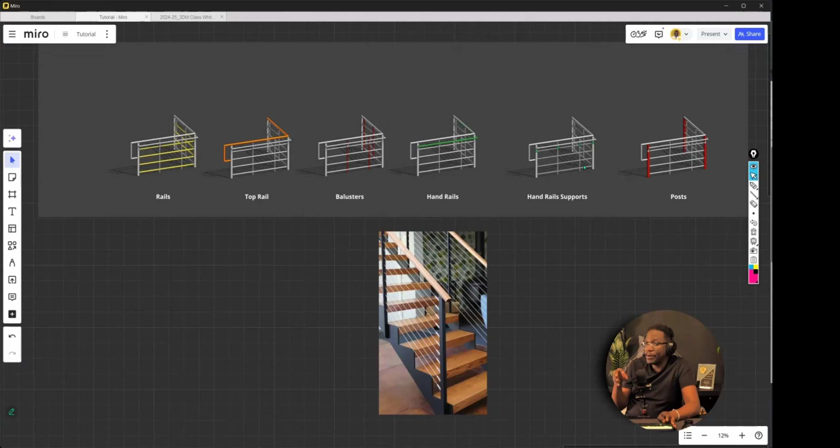Now, railings in Revit is what you call a system family, which is kind of similar to the beam system. It is a family made up of other subfamilies. So for example, the railing type itself is a system family, but each of these elements that make up the railing are individual family elements, and each of these family elements can be created or modified. So for example, we could create our own railing supports and then attach these railing supports to a railing system family to help build up a particular railing style.

Now, in our example here, we're not going to create custom railing elements. Instead, we're going to just use some of the elements that are default with Revit and manipulate them to try and get this type of railing here. So let's head back over to Revit.

Okay, so with the railing selected, I'm going to go to edit type, and right away we can see where we can edit the rail structure, edit the baluster placements, and edit the baluster offset.

We can edit the top rail. This top rail that you see here is what is represented here. There are no handrails in this design. So the first thing we need to do is edit that top rail. If we look back on our example here, we can see the top rail is kind of this wooden element. We could assume it's about maybe 2 inches by 4 inches.

So what we're going to do is just edit this railing type to match the one we want. If we go to use top rail, that is checked. This is the top rail height, so this is the height of the railing. And then this is the type of top rail being used. We can see it is 50 millimeter by 50 millimeter, but in our case we want to make this 50 millimeter by 100 millimeters, because that's going to be the width of our railing.

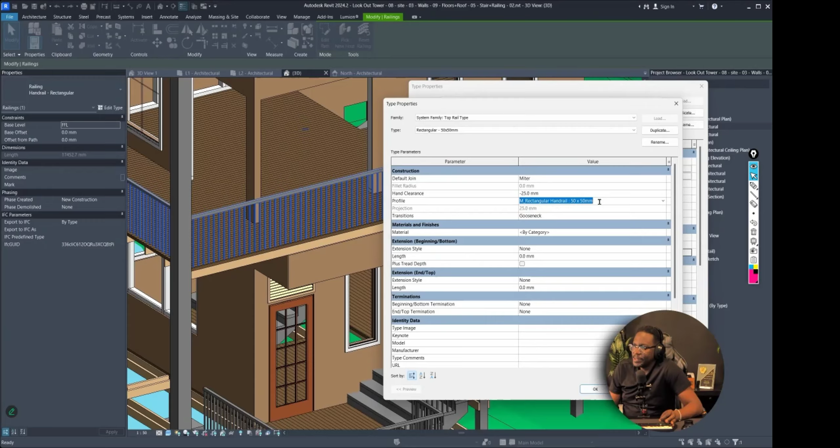Now we have to pay attention to what type of family element this is. This is a profile. So let's go hunting for this family element that is a profile to see if we can modify it.

So I'm not going to change anything here. I'm going to just cancel out of this. And I'm going to introduce you to another important part of Revit, and that is going to be our project browser.

Now we use our project browser to switch between different plans and different views. But the project browser also contains a list of every family and sub-family element that's being used in the entire project. So if I go all the way to the end of the project browser, you will see a category called families.

Now if I extend that, these represent all the families used in this entire project. And remember how Revit family works: every single element in Revit is a family. It could be a system family, or it could be a family element. There are various types of families, and the Revit family editor is almost like a program in itself.

For the most part, when you open Revit, it comes with a set of built-in families, and this includes wall, windows, railings, stairs. These are all built into the program, and every single family used in the drawing is listed here under the families in the project browser.

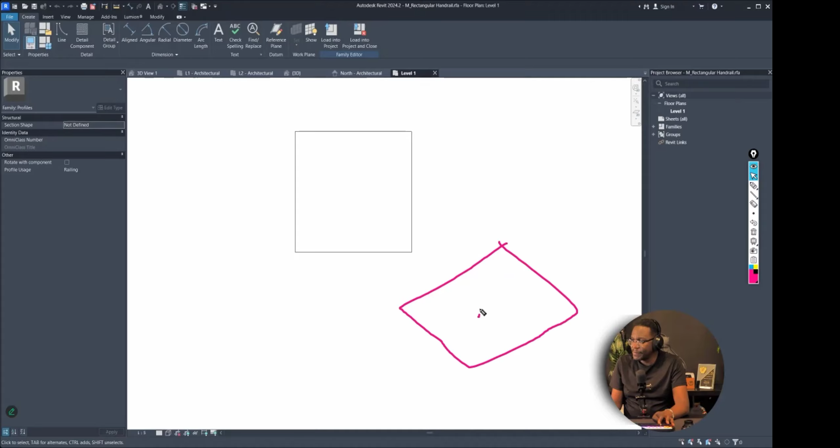A profile is a 2D outline, and the intention is for it to be extruded. For example, this is a profile that is extruded. So profile families are just 2D outlines. If there is a shape like this in a Revit family profile, then when you use it, it's going to be extruded up like this. That is the whole purpose of a Revit profile family.

This is why what you're seeing on screen is a flat 2D shape, because when it is used on the handrails, it is extruded along the path that the handrails are set. And of course, this measures 50 by 50.

Now we can click on these lines in the family editor and try to move them. However, if we try to move them, we get messages about constraints. We're not going to dive too deep into constraints now, but essentially the family editor is a parametric editor, meaning you can insert parameters to change certain values of certain family objects. In this case, the length and width of the profile is parametric, meaning it's not intended for you to move or change it directly, but rather to insert a digit as a parameter and have the size change.

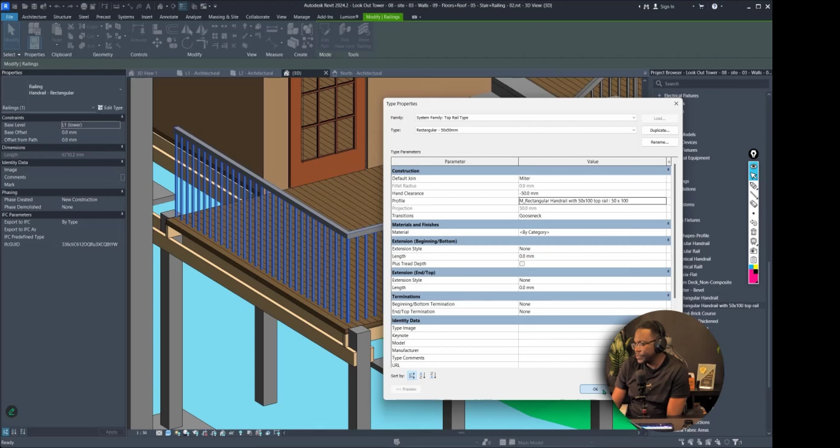Let's go to the 3D view here. Let's click on the railing type and go to edit type, and where it says top rail, I'm going to change this to the one that says 50 by 100, then choose OK. Right away you can see the handrail changed, and we are now one step closer to creating this.

We created the handrail. Now if we wanted the profile to match exactly with this rounded edge, we could go ahead and create another family profile with the rounded edges just the same. But in this case, we're just going to create a simple representation.

All right, now let's work on the balusters. First, the posts—this looks like about a 50 by 50. So let's choose OK. Now let's go to edit type for the railing again.

So now let's look at the baluster placement. Here is where things might seem a little complex, but if we look at this, it's just saying that up here we have our main pattern. Remember, you are under baluster placement. So under baluster, the main pattern is going to use these rectangular balusters—let's make it wider. The family that is loaded is M baluster square 20 millimeters.

If we click this dropdown here, we have a few other options, but we don't have a 50 by 50. Another thing to note is that to keep track of what is what, we can open the preview menu here. If we hover and click, we see these are the regular balusters. But if we click start post, this is our start post. End post, this is our end post. And corner post is whenever the railing bends a corner.

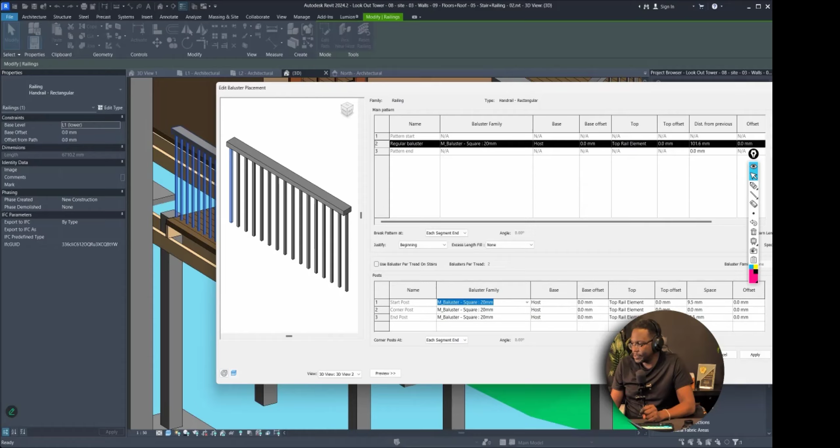So we're going to come out of this, and now we need to find that M baluster square. If we look on the profiles, notice that we don't see it here. The reason is that M baluster square is not a profile. Remember, a profile is simply something that you extrude. Some families exist as 3D objects, some exist as profiles. In this case, that M baluster is actually a 3D object, not a profile.

So we're going to close this up, find that under railings, expand this, and we see that we have M baluster square. This is exactly what we need. If we open that up, we see there are two types, 20 millimeter and 25. However, we need a 50 by 50 millimeter.

So we're going to right click and choose edit. Now we're back in the family editor, and we're going to do the same thing again. We're going to go to properties, create a new type, and call this type 50 millimeter. Now we're actually going to change the width to 50 millimeter, and that's the only thing we need to change in this case. We're going to choose OK, and we see that it has gotten bigger.

Then we're going to save this family now. We're going to call this M baluster square with 50 by 50 post, save that, and load this into the project and close.

Okay, so now we're back into the project, and just like before, we now see an M baluster square with 50 by 50 post. Let's head to the 3D view, click on it, go to edit type, go into baluster placement, and we're going to replace these with M baluster with 50 by 50, and use this one. Choose OK. Now we have the 50 by 50 for the start and end.

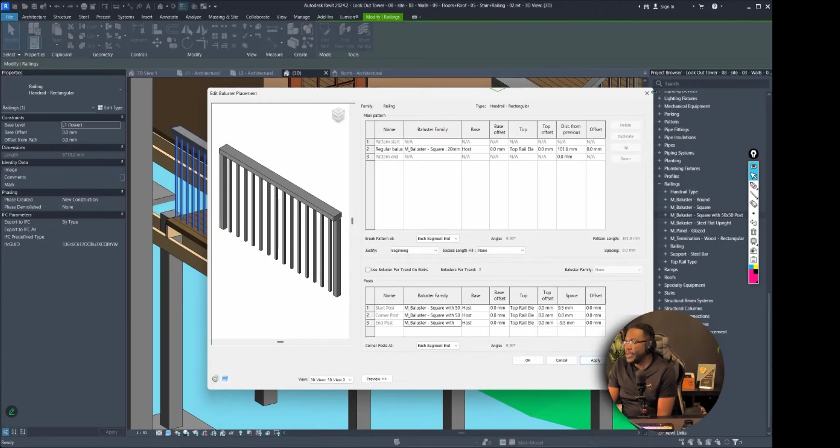Now the other thing we need to change, if we look back at our sample here, is that we only have these very slender balusters that are here, and they're not so much. So we can assume that this is perhaps 50 by 10. Now, just as before, there's no 50 by 10, so let's choose OK. We can see that everything is coming together so far.

So we need to go back and edit this one, go to edit type, and duplicate this or create a new one, and call this 50 by 10. But this actually, we don't have the option here to change length and width, so we're not going to be able to use this here. So we're going to close this.

But if we look here, we see that there is actually an M baluster steel flat. Let's see what we have here. Let's go to edit, and this is looking very similar to what we want. If we go to edit here, we see that it's 50 by 12. So let's create a new one that is 50 by 10 millimeter, and we're going to make the flat steel be 10. Let's choose OK.

Then we're going to save this new family, and we're going to do the same thing. We're going to say width 50 by 10 baluster. We're going to load that into the project, head over to the railings and go to balusters, and we're going to change this to 50 by 10. Apply. All right, there we go.

So now we have these flat pieces. Now, of course, there's a large space between them, so we could assume that this space here is maybe about 4 feet. So we need to change the distance from previous baluster to 4 feet. Apply. All right, that's looking like what we want.

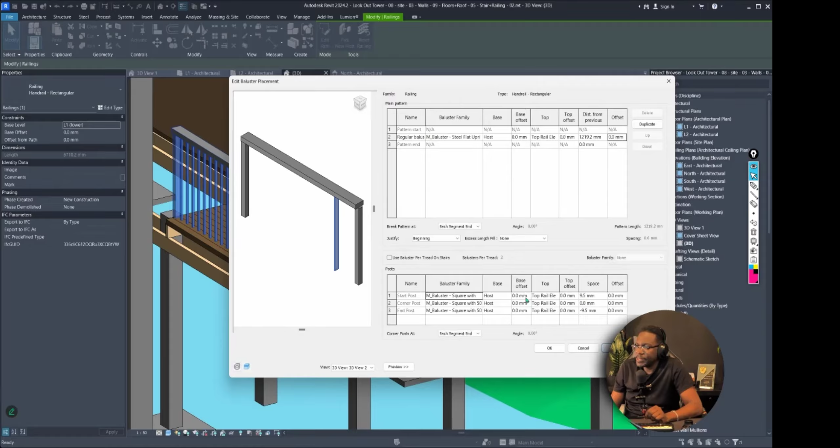Let's choose OK. We also need to overhang the top rails. So if we go to top rail, we see that we can set the offset of the top rail. So let's look into these options here.

So if we go into the top rail option, go down here, we see that we can extend the top rail. Let's extend it by about 50 millimeters, and if we choose apply, we see that it has extended that way. So we're going to extend the other side 50 as well. There we go, choose OK and OK here. Apply. Alright, so now we actually have these members.

Now we just need to add the wires, and in this case those wires would be rails. So we need to add more rails, since right now we have none. We're going to choose insert, and call this wire. The profile we're looking for is something round, so we have a circular 30 millimeter rail, and we can choose the material, let's let it be metal, aluminum. Let's choose OK and see how it looks. There's the rail down at the bottom, and it's definitely too thick.

First let's change the offset, or the height. The full height is 900, so let's make this about 800, maybe 700. There we go, alright.

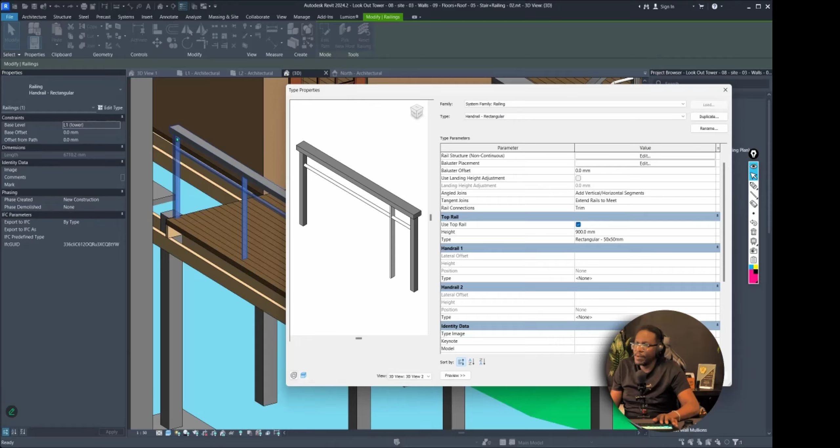Now the only problem is that this is too thick, so we need to do the same thing again. We need to go to our families, and this is a profile, so we need to look under profiles, and we see circular rail. Let's edit this, go to the properties, and create a new one, and make this about 5 millimeters, so the diameter will be 5 millimeters. Okay, we need to save this family, and we're going to call it wire rail. It's okay, load into project.

Alright, so now let's go to the rail structure, and we're going to change this to, here it is, rail with wire. Alright, that's looking pretty good. Now we just need to duplicate this a few times, so let's make this one 600, and let's duplicate it again. Let's duplicate, alright, that was okay. So that's it, we have now changed this railing type, so now all our railings are updated.

We need to put another railing here, let's do that. So we're going to go to edit, and it's okay. Alright, alright, that's our railings and our stairs.

Now, if you notice that we have these handrails that are a little higher, that is perhaps because of how we choose to terminate the stairs. So we're going to go to edit type, and choose to end with, let's see if we choose end with riser. Right, so now this is a little lower.

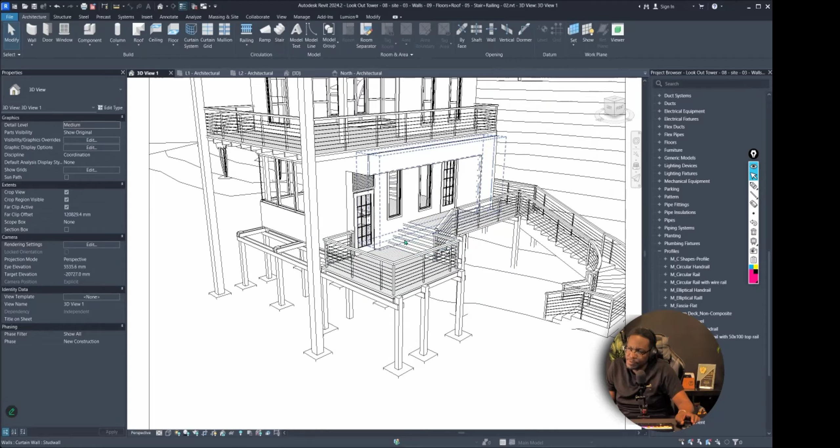There we go, alright, so now we have just added railings and stairs. We looked at 3 different types of stairs: the straight stairs, which is a pretty common type, a custom stairs that we created here, and a spiral stairs that we created inside.

We do need to add railings to the spiral stairs, so don't forget to do that. We're going to go to railings and choose attach to stair.

There we go. And then on the upper floor, so you arrive here, so we would need to add a railing here, and we would need to add a railing here. Oh, let's make sure we're on the right level, this needs to be FFL. So let's go to railing again and make sure that we are on FFL, and we're going to do something like this. There we go, and we're going to modify this here. Okay, alright, now we have fully added railings, and with that said, our building is looking quite nice.

Alright guys, so yeah, I have a question sir.

Yeah man, go ahead. Sir, so we can just import a railing family from a site and just use it?

Yes, you can, you're free to use whatever railing you want. Yes sir, that kind of tedious though.

I know, but guess what, a lot of times when I look at final projects and your elevation is pinned up on your sheet, I see the default railing and I'm like... so you can most definitely download railing families, because nowadays there are so many resources for railings, just pick one. The thing is, Revit allows you to do that in real time, so you can change the type of railing, the balusters, the material, without having to leave the project.